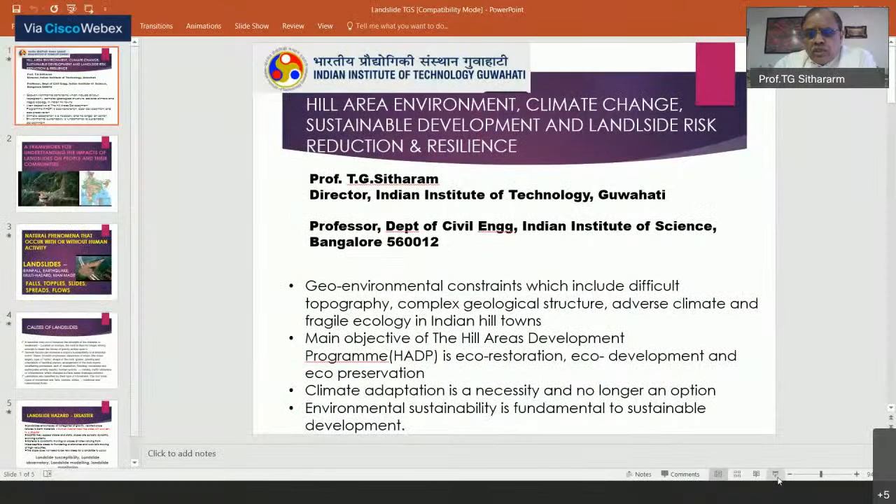So let me share a brief presentation for my special address. I hope I will be able to see my presentation - can you see my slides? Yes sir, it is visible. This topic is very, very relevant for the Northeast, that's why we immediately accepted Professor Surya Prakash's suggestion to have hill area environment, climate change, sustainable development, landslide risk reduction and resilience as the theme.

Such a long title, with very difficult topics all involved. As you know, the environmental constraints include very difficult topography, complex geological structure, adverse climate, and fragile ecology - this applies to most Indian hill towns, whether Himalayas, Western Ghats, or Northeast. Northeast is much more vulnerable because it is in zone 5 of the earthquake zone, as well as being a heavy rainfall area - it receives huge rainfall, with Cherrapunji, the highest rainfall city, also located in the Northeast.

The main objective of the Hill Area Development Program of the Government of India, under which many districts and cities have been identified, is basically eco-restoration, economic development, eco-development, and eco-preservation. As we discuss climate change, climate adaptation is a necessity and no longer an option for us. This has almost reached extremes. Climate change has caused, whether it is rainfall, floods, drought, earthquakes, vibrations, or landslides, many hazards that also cause disasters. So environmental sustainability is fundamental to sustainable development. We are signatory to the SDG goals with the United Nations, along with all other countries. It was signed in 2015, for a period of 15 years, so we have almost close to 10 years left to implement the SDG goals.

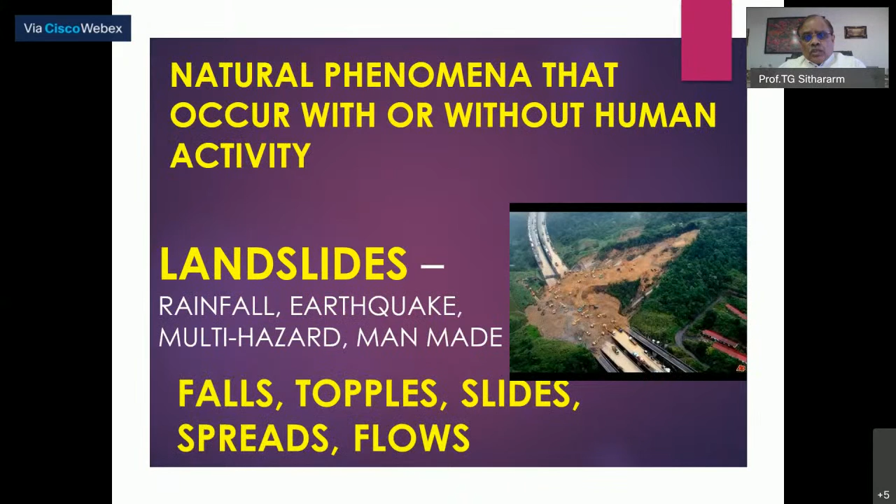Technologically also, it will be quite different. The natural phenomena that occur with or without human activity is the landslide, which is a natural phenomenon, basically gravity-related work. Due to gravity, the soil would like to come down. There could be reasons like rainfall, or induced earthquake, which is also very prevalent and common. Man-made causes include cutting, undercutting, and all that, which have already created many disasters. But what is very important is to look at the multi-hazard, because now suddenly there could be rainfall, earthquake, and also man-made activities combined, so we need to look at multi-hazard analysis of landslides.

Different types of landslides include falls, topples, slides, spreads, and flows. Let me touch briefly on the causes of landslides. A landslide may occur because the strength of the material is weakened. Particularly, we are looking at soil located on a slope - the rock is no longer strong enough to resist the forces because the surrounding soil has become weaker and forces of gravity act. So basically it's driven by gravity, and during earthquakes, that also transforms into a force of gravity.

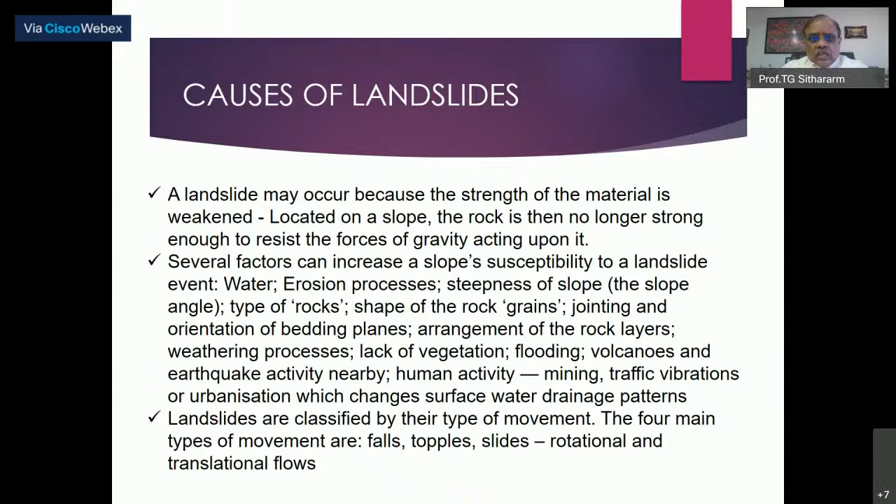As I told you, a landslide hazard turns into a disaster when it comes in contact with human habitat. Landslides encompass all categories of gravity-related slope failures in earth materials - it could be soil, sand, clay, rocks, or jointed rocks. But please remember: slopes only appear stable, they're not actually stable - they are always a dynamic, evolving system. Because Mother Earth also vibrates, these slopes are also constantly under dynamic movement.

Okay, any slope for that matter - see, it is under constant... it may not be visible to you. It looks stable and static to you, but it is constantly a dynamically evolving system. Material is constantly moving on the slopes at rates varying from imperceptible creep, which may not be visible to your eyes, to thundering avalanches and rock falls moving at very high velocities. So a slope does not need to be very steep for a landslide to occur. That is what you have to understand.

So landslide means it is not just a very steep slope where only hill slopes can come down. No, slopes can be very gentle also, but landslide can occur. Okay, that's one thing you need to carry as a message.

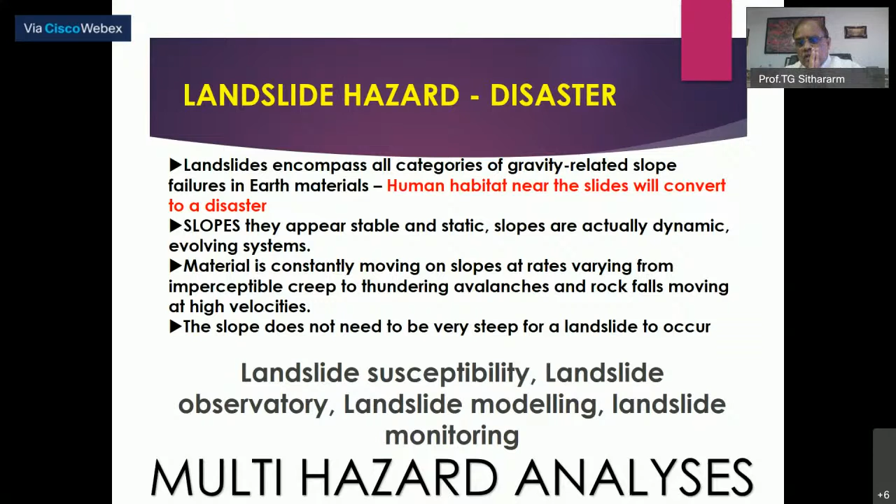Thank you. Namaskar. Yeah, so if you want me to go ahead with my talk, I will go ahead. Carry forward to your talk. Okay, thank you.

Can you see my slides? Yes, sir.

Today the topic I have chosen is not about landslides directly, but about making sure landslides don't affect our major infrastructure projects. The topic is slope stability analysis of highly jointed rock slopes in the Himalayas, and the abutments of the world's highest railway bridge across the Chenab River in Jammu and Kashmir, a very important project for India connecting Kashmir to the mainland. I've been associated with this project since early January 2005, and it's still not completed. Maybe by next October the entire bridge will be ready.

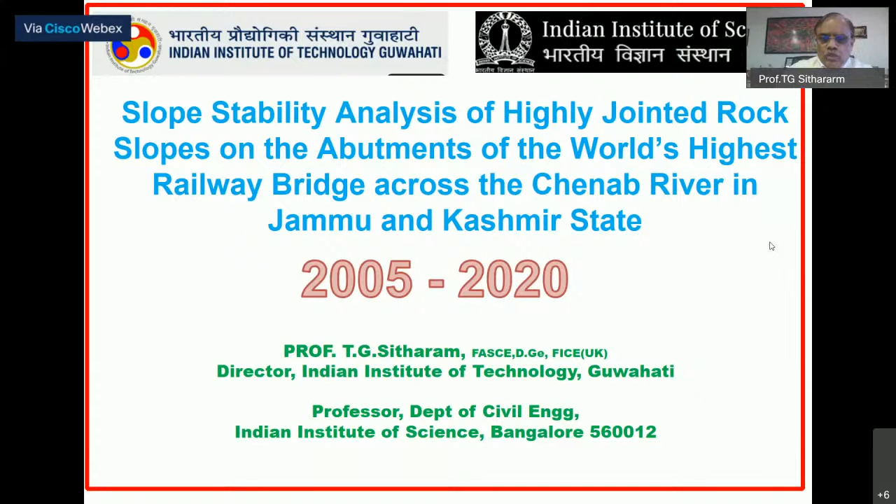So this is the Chenab Bridge location. As I told you already, it's about 50 to 60 kilometers from Katra town. I did a first visit in 2005.

In 2007, there was a lot of deliberation to change the alignment. Why did the change of alignment come into picture? Because of landslide concerns, they thought these hills are not stable. So every expert—I myself have seen 10 experts from 10 different countries, including top-notch experts of rock mechanics and rock engineering in the world.

We had so many deliberations. I was representing Messrs. Afcons construction, and there were experts also from other IITs and other places for the railways, because this project, even though it belongs to Northern Railway, was executed by the Konkan Railways, which is running this project, sitting in Jammu.

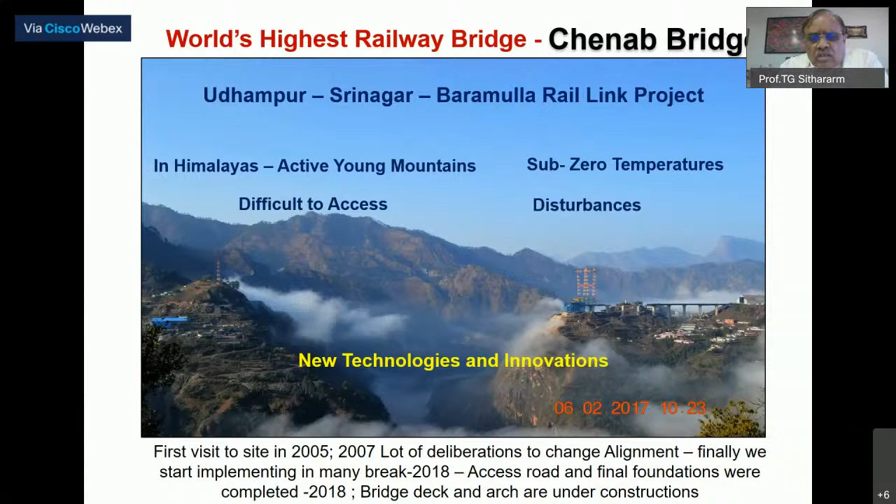This is in the Himalayas, among the active young mountains of the world, with sub-zero temperatures, difficult access, and disturbances—I don't need to highlight too much about the disturbances. So there is new technology and new innovation at every step of construction of this bridge. Almost 2005 to 2019, close to 15 years, was spent only on the embankment, the abutment slopes, cutting slopes, putting the foundation, and raising the pillars.

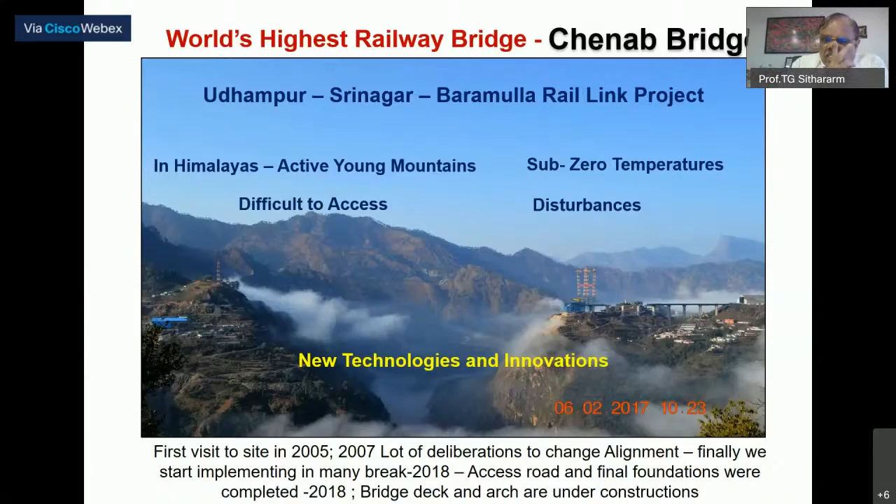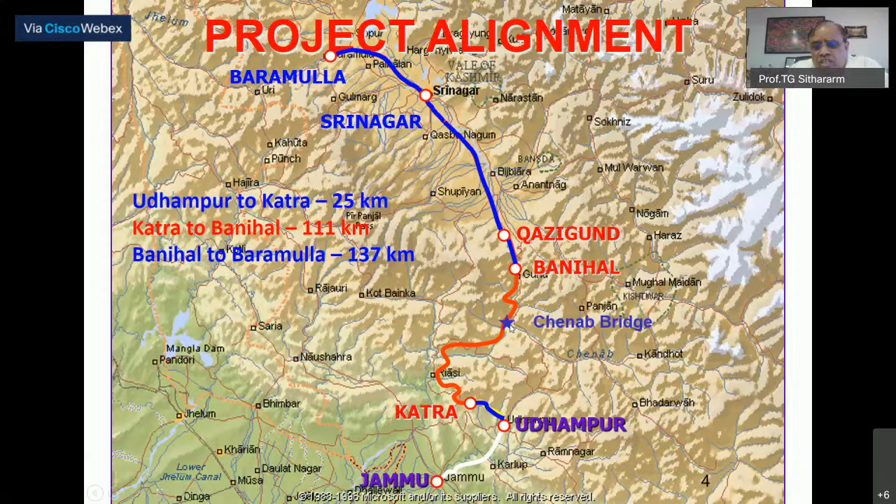So Katra, this is the Riasi which I showed you in the previous slide. Katra to Banihal is the stretch under construction, which is 111 kilometers long because of the circuitous route. And the Chenab Bridge is across the Chenab River, which is flowing there—that is the location of the Chenab Bridge. You understood now? I think the location is very clear.

So what we have adopted is a very interactive design—what we call an observational method as per the International Society of Soil Mechanics and Geotechnical Engineering. There is a special committee called TC206, which looks at interactive design, which is currently very unclear or undefined. It's a new committee looking into what this interactive design actually is.

I will highlight to you soon what this interactive design is in geotechnical engineering—it has become very common now. It appears to be the same as the observational method, but it is not; the observational method has a body of references and is quite common in tunneling. In tunneling, you excavate, observe, and then adopt a newer design methodology for the next section before excavating. It has a body of references and is already referred to in guides, codes, and Eurocodes, which also talk about the observational method. But what I'm going to talk to you about today is what is called interactive design.

Interactive geotechnical design is a design approach that requires refinement throughout the project execution period until a suitable technique and optimum scheme are applied to the problem at hand. In general, use of interactive geotechnical design is not frequent, however in large projects it has to be iterative. That is why this interactive design plays an important role in many large projects, whether it is highways, airports, tunnels, or railway lines. We learn more about ground realities and the design is modified or updated as we move ahead.

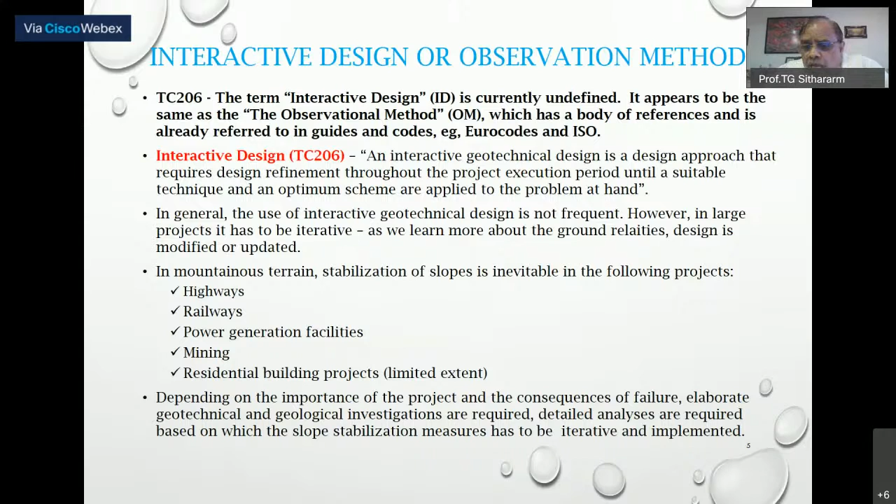In mountainous terrain it's very critical; this interactive design plays a major role, particularly in slope stabilization. It is inevitable in highways, railways, power generation, mining, and residential building projects. Depending on the importance of the project and the consequence of failure, elaborate geotechnical and geological investigations are required. But these investigations are not done once, they are done in many stages and phases, and the slope stabilization measures also have to be iterative and implemented in an iterative manner.

So what I termed it as, this is a completely new topic. We termed it this way because, as I told you, we had 15 years on this one project, with several engineers, and Afcons is very proud of this project. We called it a design-as-you-go project. Actually several PhDs have come out of this, both at the Indian Institute of Science, and right now one of the senior-most vice presidents of Afcons Infrastructure is also working on this at ISM Dhanbad.

So it's called interactive geotechnical design, which establishes guidelines and technical recommendations within the TC206 committee, which is looking at it. I recently gave a talk to them as well. So let me define the problem to you.

Highly jointed rock mass is predominant in the Himalayan regions, where the ground was subjected to severe tectonic activity due to the pushing of the Gondwana land into the Eurasian plate. As you know, the Indo-Australian plate is where India is located. This Indian plate is pushing the Eurasian plate at a rate of 50 millimeters every year. That means the Himalayas are rising every day. Please understand this movement is common.

So when you look at stability aspects, this movement has to be considered, because it is not a small movement. Seismic activity is also still very present, since this is a plate boundary between the Eurasian and Indian plates. So the problem is, because of this, these rock masses are highly jointed, which is close to soil from a strength point of view, but behaviorally it still has jointed characteristics.

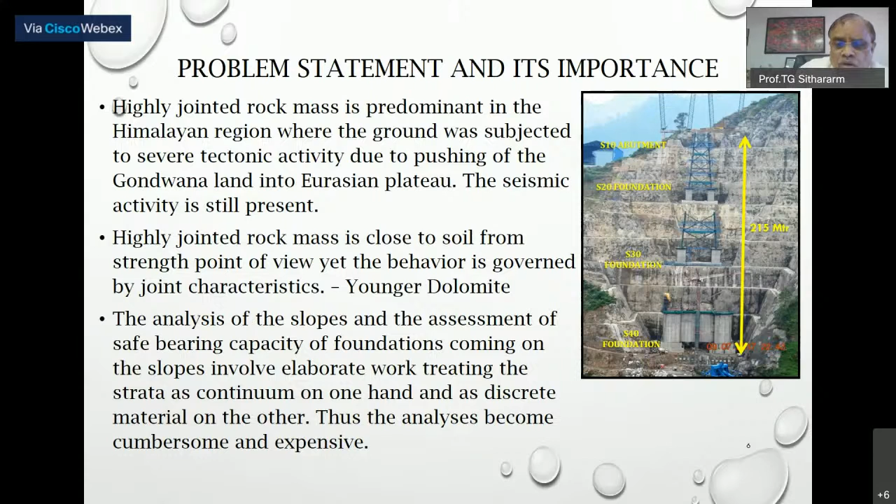Our objectives, posed to me by the company, were to determine the intact rock and rock mass parameters for the analysis and design of slopes in jointed rock mass, suggest appropriate parameters based on detailed geotechnical investigation for slope design, determine the stability of slopes, suggest appropriate stability analysis and stabilization methods, and lay down the principles of design-as-you-go, bringing out the methodology and its implementation.

Every section which is constructed, we have to go and visit. So I might have visited that location maybe about 25 to 30, 35 times. Very difficult to reach, but that is a different experience. Once you see the pictures, you will understand.

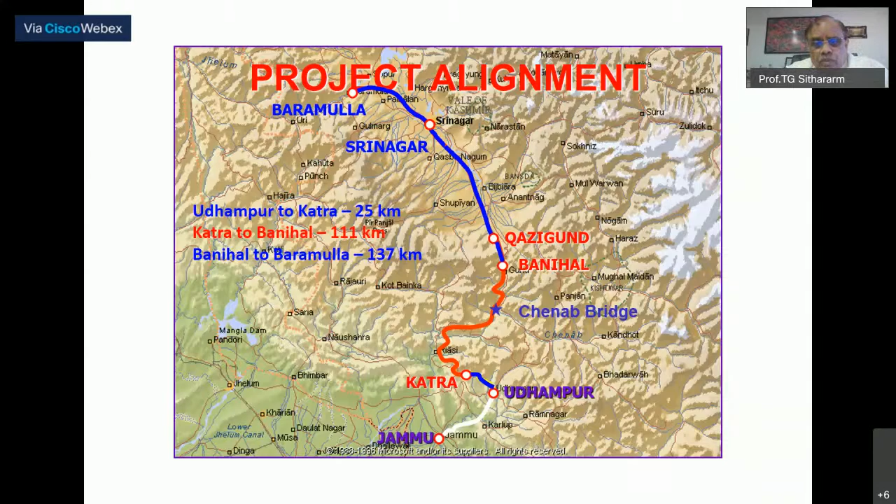So let me tell you about the bridge. As I told you, the Chenab Bridge crosses the Chenab River, between Katra and Banihal. The deck is about 362 meters above the water level of the Chenab to the top of the deck, and this is a complete single arch spanning a width of almost 780 meters, with a total length of more than 1.3 kilometers.

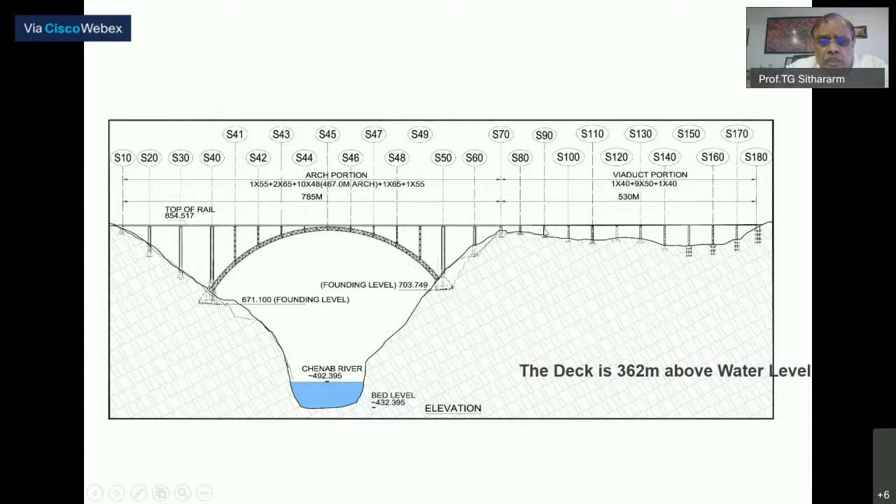And this is the approach viaduct portion. Please note these are all tall pillars, and the bridge itself is a steel bridge. It is taller than the Eiffel Tower.

This is how the slopes were cut, and even the design of the slope profile to be used involved several discussions. Initially we thought we could put the pillar foundation through a drilling machine taken by helicopter and then drill and put the pile foundations. All options were discussed, deliberated, analyzed, and finally this cross section was adopted.

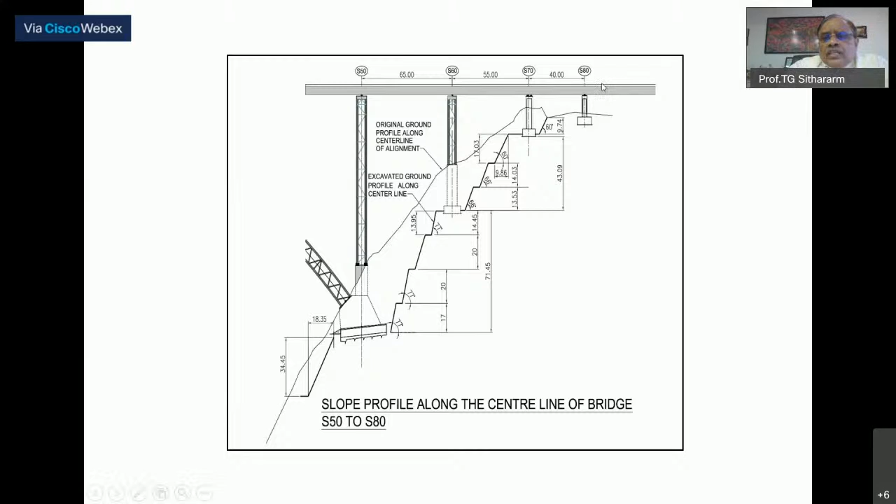This is from the left side, from S10 to S40, and on the other side from S50 to S80. This is where the S50 foundation is anchored through the arch, and these are the columns - S50, S60, S70, S80 - going up to S180 in the valley.

So you can see the terrain before excavation and after excavation. To do all this, we needed to cut a lot of slopes to make roads and access roads so that construction equipment could move.

Whatever is done in this project is a world record, including the crane, which they have entered into the Guinness Book of Records. Everything is beyond imagination, and the kind of rock cutting which we have done is huge and unimaginable.

So the first question was, is this site stable? We went through by foot and by boat and looked at many landslides. But at the correct site, where we looked 2 kilometers downstream and 2 kilometers upstream of this location, there were never any landslides - otherwise beyond 2 kilometers, a lot of slope slips had occurred.

So you can see the S40, S30, S20, and S10 foundations - this is a 215 meter tall slope on one side of the abutment. Look at the quantity: 3.15 lakh cubic meters of excavation, and this doesn't include the road construction excavation - this is only for this slope.

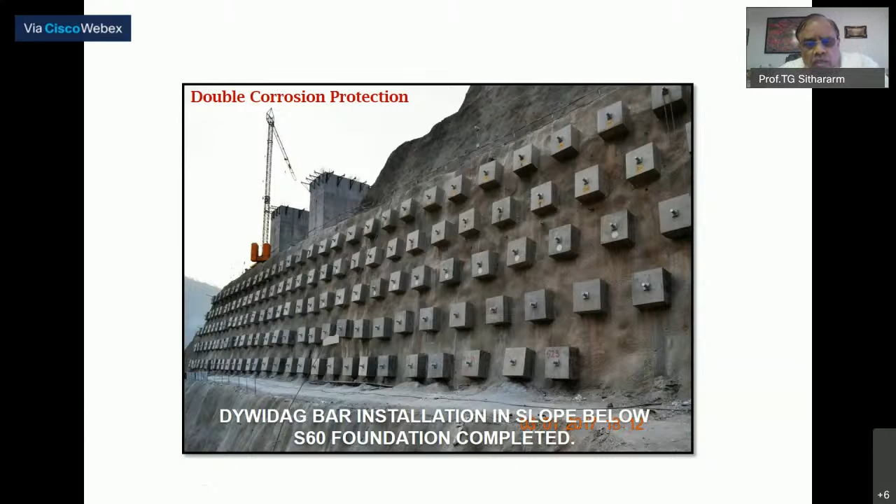The kind of rock bolts we used, the Dywidag bars installation in the slope - this is one typical example of the rock bolts shown. Double corrosion protection rock bolts were used, and since we didn't have a proper code in India, all the BS standards were used, as was required by the railways.

The field investigations - these were the initial slopes. You can see these are some of the cut slopes made for the access road. We had to cut a lot of access roads to reach this location of the bridge - finally, this is the location of the bridge. On one side, soon after the bridge, it enters into a tunnel, which makes this very unique, and also the wind speed there is very, very high.

So for geological logging, I even suggested to them - this is what myself and Professor Ramamurthy of IIT Delhi suggested - that we should have an adit tunnel just above the foundations.

So that means this will be excavated now, and when excavated, this will be vanishing. Okay, so this was above the foundation level at S50. Similarly at S40, this is the location you can see.

So we have drilled about almost 300 meters, and then went in laterally also another 150 meters on either side. A lot of tests were done. We can visualize what kind of rock, what kind of joints, was there any slip failures, and all that. So geological logging of these drifts were done.

Okay, and also outside the drifts, open area pits are also done. So a lot of logging was done. We could see many joints, J1, J2, J3, J4, and in some places more than these 4 joint sets, but 4 joints are very prevalent.

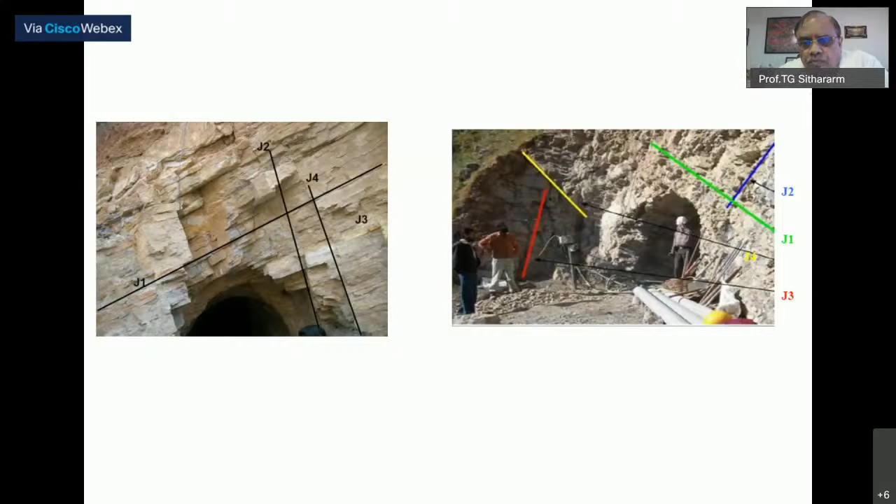Okay, so this is the adit which has been mapped with joint locations. So you can see the final geology of the main tunnel and of the drifts. Just to summarize: highly fractured dolomite, joint spacing between 20 millimeter to 500 millimeter, joints filled with silty sand and silty gravel, presence of open joints.

I will take 5 more minutes to complete. RQD 0 to 10, RMR 35 to 42, UCS 16 to 62 megapascals. Permeability is more than 50 lugeons. There is no groundwater at all. Okay, so this is a very complex site.

I will not get into the details, but some of you may be interested. A lot of geotechnical testing was done over a period of time and in several phases: plate load test, in situ box shear test, borehole data. Based on the borehole data, RQD, UCS, RMR was also done. Settlement characteristics like shear wave velocity and tomography were also done. Dilatometer test, plate load test data, borehole data - lots of tests.

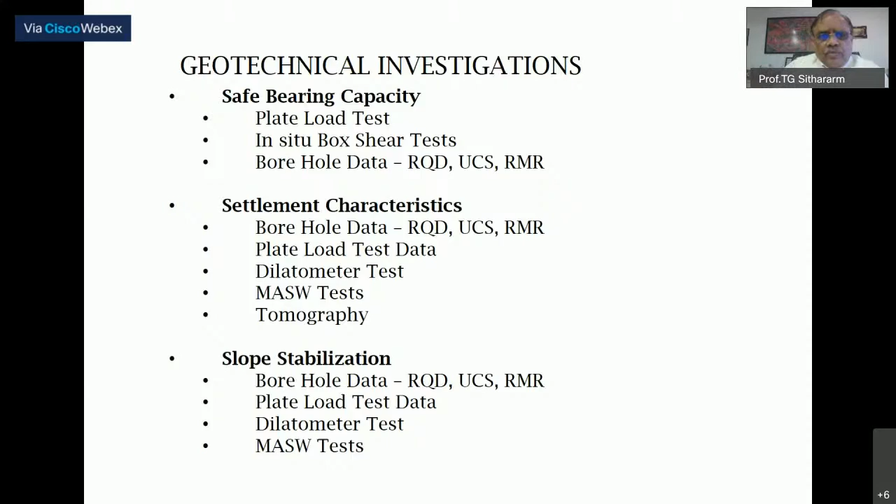Okay, so summarizing these parameters and deciding what to select for the analysis was also a great challenge. Many discussions were held with the technical advisory board, several parameters were selected, several variations were done, and minimum parameters were chosen for the analysis.

Then coming to the earthquake - this is the area, and even though we say it is zone 5, India doesn't have a record of any strong earthquakes here. We have not recorded properly yet, because proper recording has only been done in the last 20-30 years. So there are not many major earthquakes recorded.

But what we have designed for is the maximum credible earthquake of 0.36g, and design basis earthquake of 0.18g. We have taken both the vertical as well as horizontal components of these accelerations on the slopes.

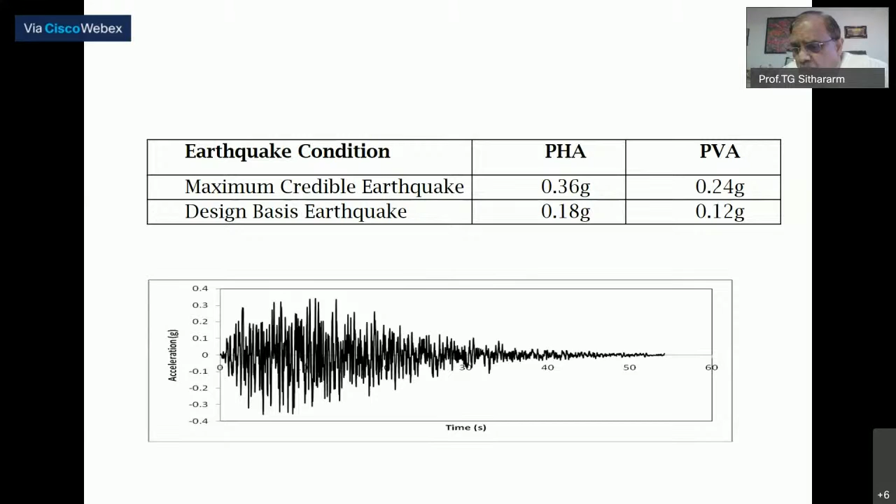So for the slope analysis, the railways have asked for a minimum factor of safety of 1.5 with static load after the excavation and putting the treatment. The static load with DBE seismic load factor is 1.2, and static load with maximum credible earthquake seismic load is 1.

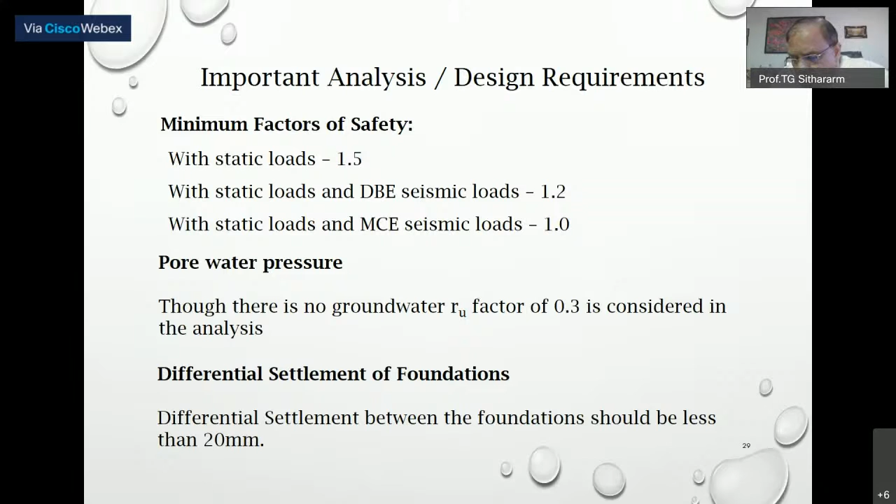Pore water pressure - though there is no groundwater, you should still take some pore water pressure into account. That was the recommendation, so a Ru factor of 0.3 was considered. And differential settlement allowed was only 20 millimeters. Please note that, that's a very important design parameter.

So numerical and analytical programs were used. Many of them we have done - as I told you, 3-4 PhDs are completed at the Institute of Science, and right now one more PhD is going on.

So average dip direction and dips were used, Swedge continuum approach was used, FLAC and Slide were used, and also Itasca, which is a University of Minnesota company, has also done analysis using 3DEC. Anyway, I will skip some of this analysis data - you can see the pictures. If you have any questions, you can ask me.

So this is, finally, from our detailed analysis of more than 10 years and a lot of PhD theses, what we found is that the bridge is like an ant over an elephant. These slopes are so huge - there could be some slips and other things locally, but globally this bridge is not going to change any scenario, because these are moving slopes anyway. So putting the bridge is not going to change any scenario.

So I even termed it and put it in front of the very high profile committee - I said it's an ant over the elephant, it's as simple as that. That means the elephant doesn't even feel the ant.

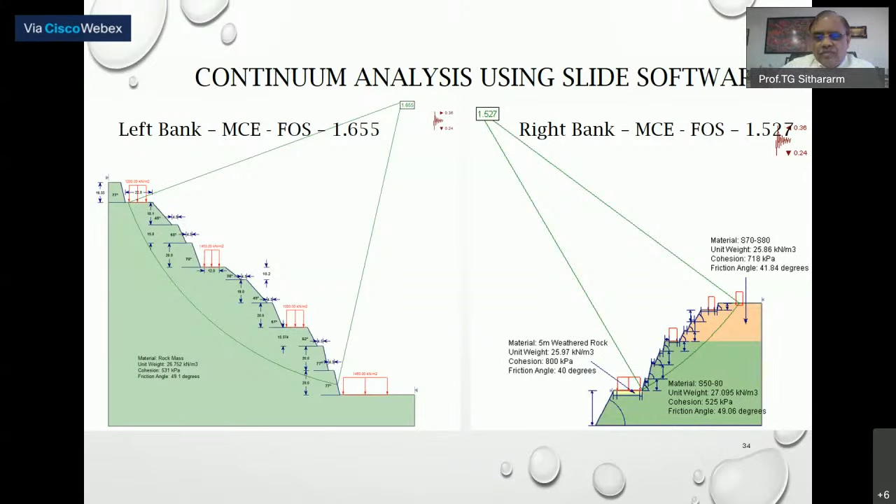Okay, so the continuum analysis - it's a lot of analysis, I'll tell you, I don't like going into it because as I told you, 4 PhDs have been completed on it. So it's very difficult to summarize. All the displacement, relative displacement, was kept less than 20 millimeters. So our strengthening measures - rock bolting, done in stages with excavation - all that is fantastically done.

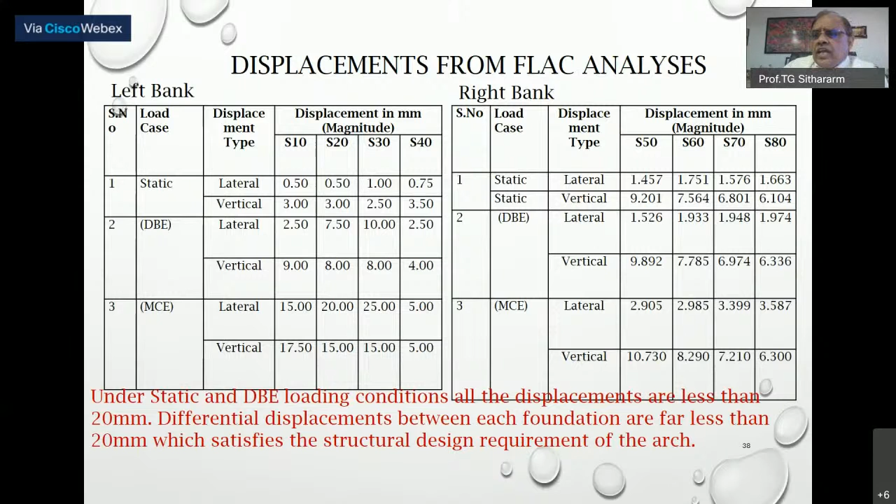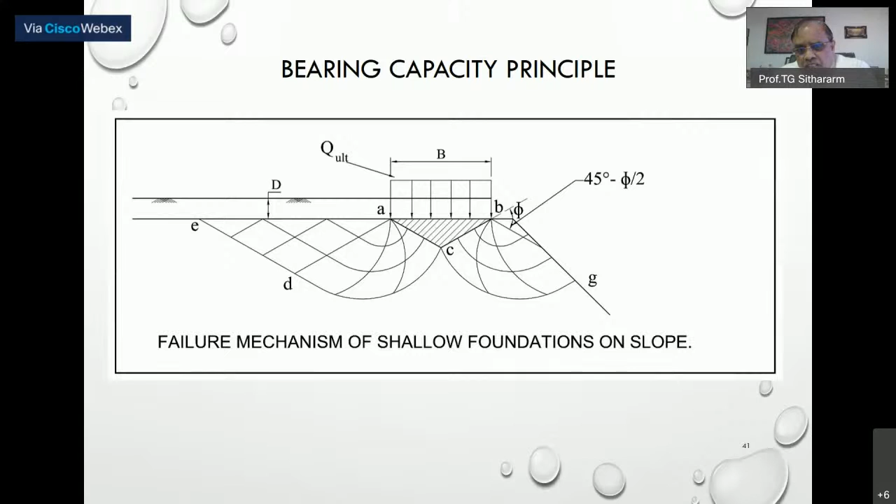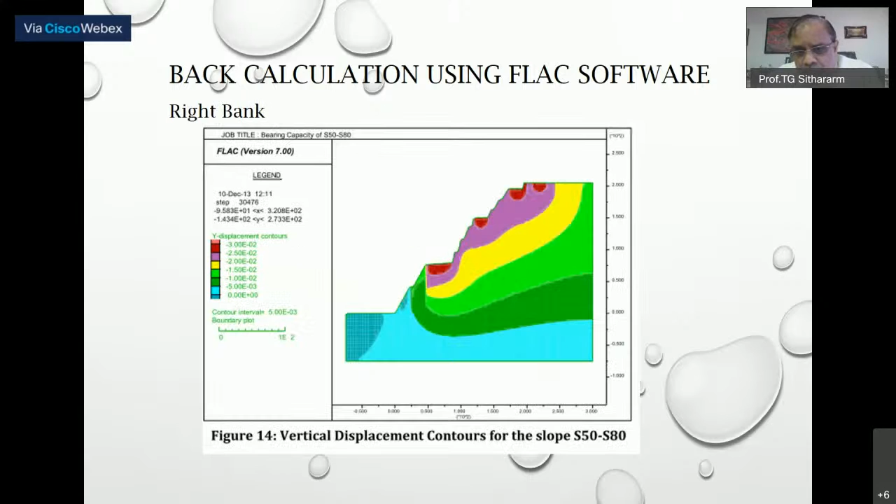The dynamic and differential settlement and differential lateral displacements were also considered. Under dynamic loading, static loading, and quasi-static analysis were all conducted. Under dynamic loading, the predicted displacements are towards the right side into the hillock, hence not endangering the slope. Then comes safe bearing capacity - the problem is, since these are all on the slope, one side of the resistance will never come in, so there are no proper guidelines. Ledge resistance is the only guideline in the Bureau of Indian Standard Codes, so we took those guidelines and designed, and finally assessed the bearing capacity. I will show you some of the bearing capacity analysis, and since we have done slope stability also to evaluate our safe bearing pressures.

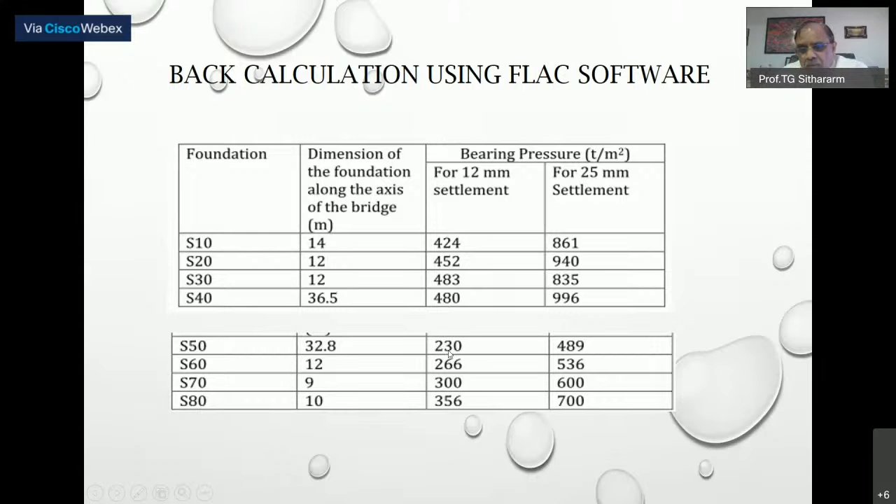I found that the bearing pressures look at 424 to about 1,000 ton per meter square at different locations of the foundations. 230 was the lowest. But what did we use? From the slope stability analysis also, we consistently get more than 200 ton per meter square. But what is finally recommended? Only 100. And this was again discussed with the railways - they adopted only 90 ton per meter square. So you can see how much.

Why 90? Where was the logic? It is based on RQD, but RQD is such a crude test. RQD was the only one which gave the lowest value, 87.4. But the rest of all techniques gave a very beautiful, high value of the safe, reliable bearing pressure.

Anyway, I will conclude as I promised you. Kinematic analysis was also done, and predominantly we see some wedge failures locally. That is why we adopted a lot of rock bolting using Dywidag bars and other things. Wedge failure analysis was done very methodically after every excavation, so that we did not face any failures - we never had any failures.

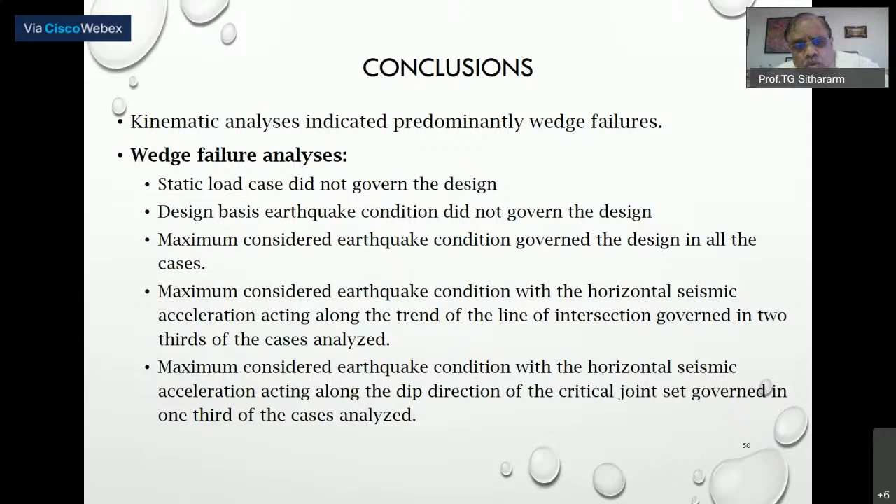Static load case, dynamic load case, and quasi-static load case were all analyzed. Continuous analysis was done on both sides for excavating. Safe bearing capacity was adopted at about 90 ton per meter square, and then assessment of slope mass rating. Whatever methodologies are available in literature, all have been tried, attempted, and demonstrated for this project.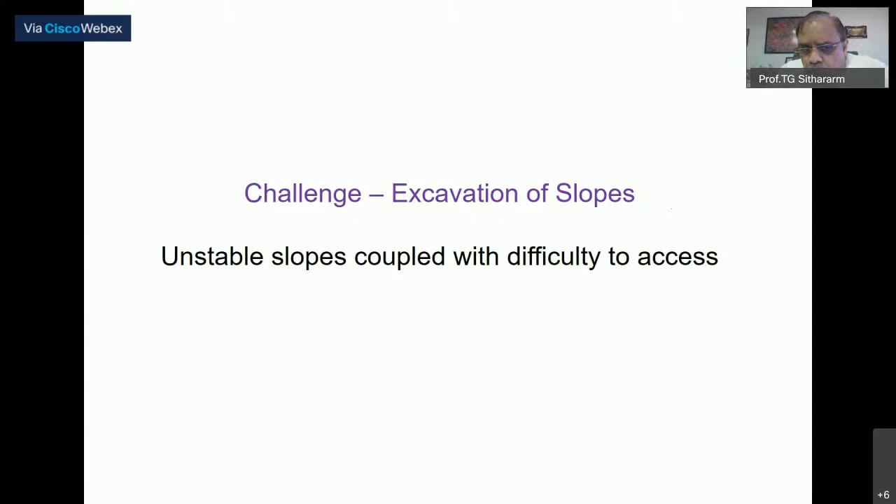Just to give you a last slide on the challenge of excavation of slopes: unstable slopes coupled with difficulty to access. We had to make a 2.5 kilometer approach road on one side. Thanks to many of the railway engineers, it's a very hard job - every day moving on the roads is a nightmare. Whenever I went, I used to close my eyes and sit, because you can't see the right side or, while coming back, the left side. It's very, very scary, because it's almost like 300 meters up. Suddenly there are no curbstones, nothing, and roads are also not properly made - it's all under construction while we were moving there. So making approach roads alone will take a lot of time and a lot of analysis.

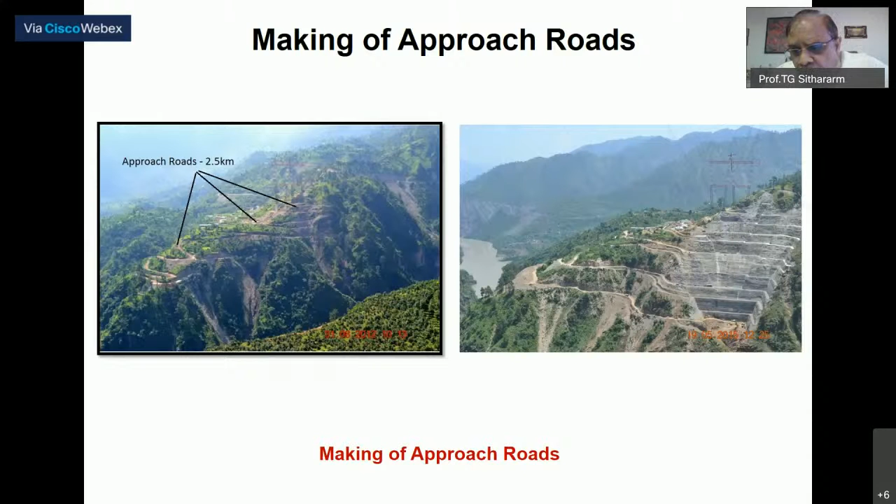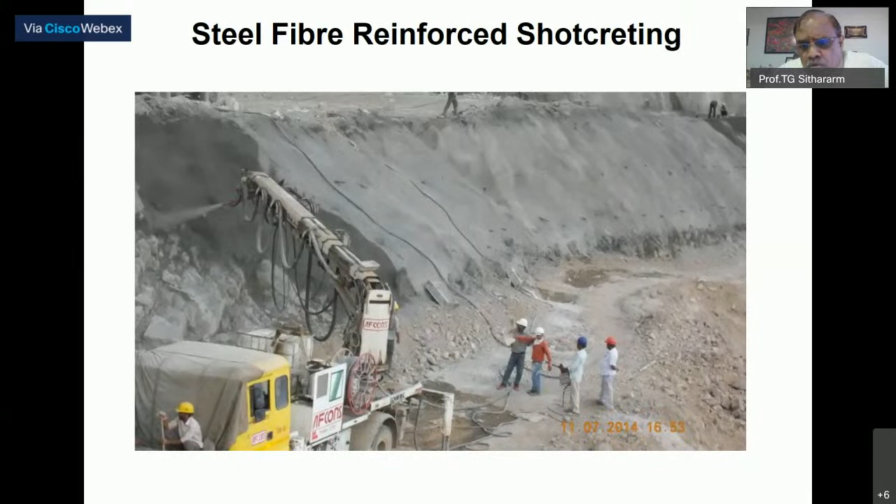The excavated slopes were shotcreted using very high technology materials. Cleaning was also done very methodically - congratulations to Afcons. These are the kind of fabricated rock bolts you can see. High technology equipment is used, and many times this kind of drilling equipment is also very state of the art. Everything was state of the art, because we are building the world's best.

So the key to success is discipline: strictly follow the contours during excavation, strictly follow the top-down construction, design as you go, validate the design assumptions as the excavation progresses. A lot of testing using sophisticated equipment with robotic controls and high reach were done.

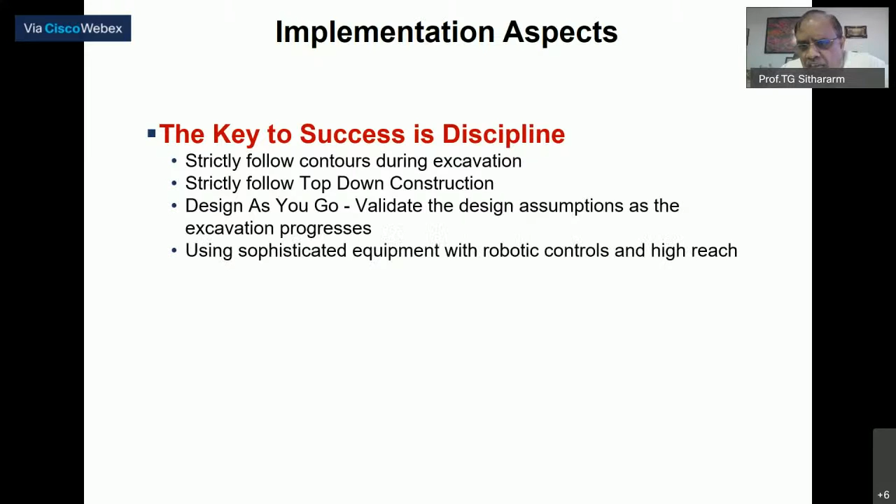To conclude, the kinematic analysis indicated predominantly wedge failure locally, but otherwise the total slope was perfectly stable. Even today I can guarantee you, as I told you, the bridge is going to put a very, very small load - even though for a structural engineer this is one of the highest elevated bridges and one of the most complicated bridges with earthquake, land, and wind load. Large loads are coming, but to me, for my slope, the entire bridge with all the wind load and earthquake load is like an ant to an elephant. With this, I thank you very much.

And this would be the final bridge - when it comes, it looks like this. Thank you.

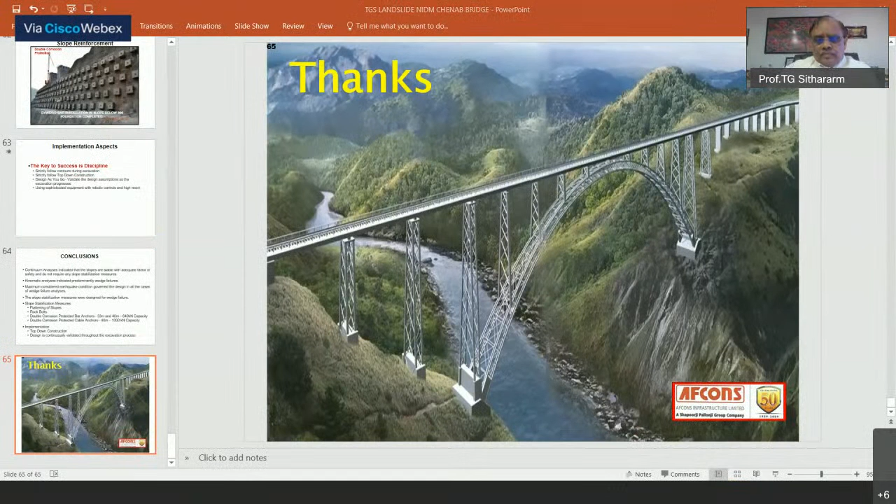Thank you for highlighting the Chenab Bridge project and briefing about the interactive design and observational method in the Himalayas.

Sir, one of our participants, Mr. Hemant Kumar, asked a question: does continental drift or subduction also affect landslide occurrence? Please repeat the question. Is continental drifting or subduction also affecting landslide occurrences?

Definitely. As I told you, slopes are all moving, because there is movement of the landslide mass itself. So it's a gravity effect, and it will definitely be aided further by rainfall and earthquakes, or human activity like vibrations. It will be accelerated. But otherwise also, these slopes are continuously under movement.

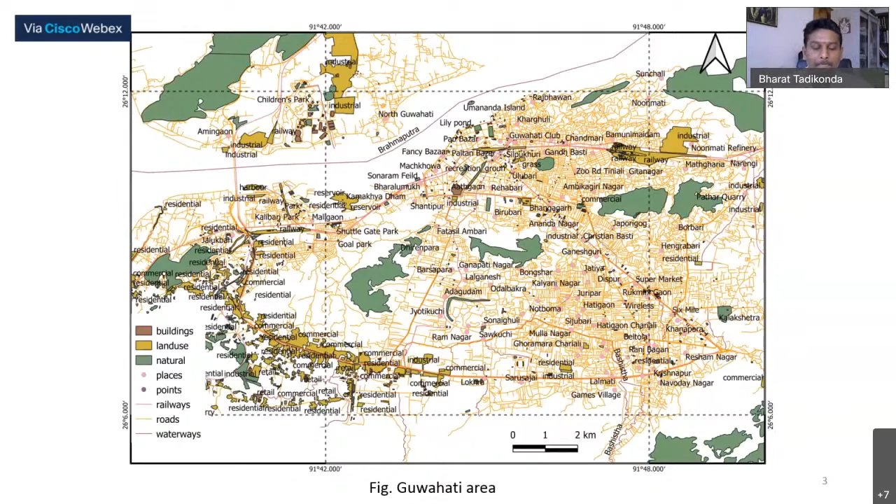If we focus on the striking geomorphological features, there are 9 hill series situated in and around the Guwahati area. There are also low-lying alluvial plains and marshy wetlands. The important hill series for this presentation are the Nabagraha Sunsali Noonmati hill series, on the southern bank of the Brahmaputra river, and Agyathuri hill, on the northern side of the Brahmaputra river. Our IIT is situated next to Agyathuri, between the Agyathuri hill series and the Brahmaputra river.

And the Nilachal hill, the 5th one, where the Kamakhya Mandir is situated. From IIT Guwahati campus, we see the Nilachal hill. Currently from my window, I can see the Nilachal hill. So this is the geomorphological features of Guwahati.

All these hilly areas are susceptible to rainfall-induced landslides, because even though they are comprised of granite gneiss complex, they are capped with residual soil formed due to disintegration or weathering of in-situ rocks. So all of them have this red soil formation due to vegetation and weathering processes.

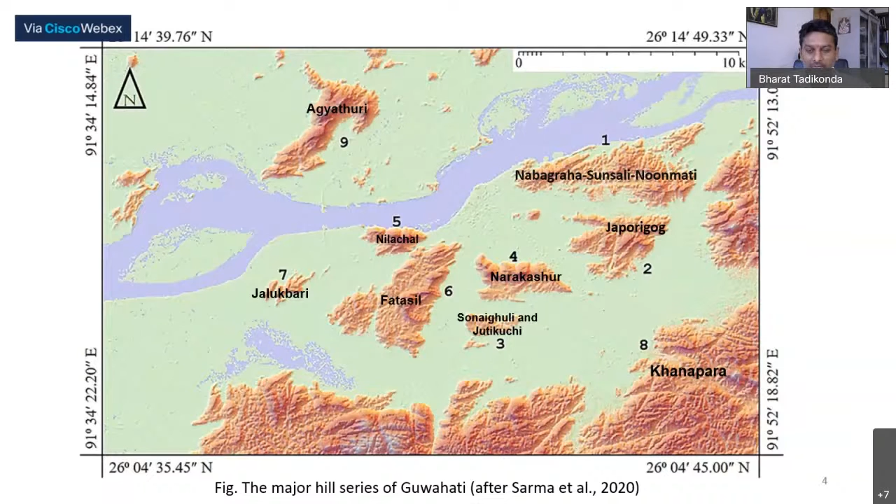So I'm focusing on the Agyathuri and Nabagraha Sunsali Noonmati hill series, because several landslides occurred there in the month of June 2020, very recently, a few months ago. This is very close to IIT Guwahati, the Agyathuri hill series, and the other one is right across the other bank.

So let me go through some of the landslides at the local scale. This is on the Nunmati, Nabagraha Sunsali Noonmati hill series, also called Kharguli Hills. On the Kharguli Hills, this is the Raj Bhavan, where the governor's building is situated, and there is a landslide that occurred on 24th June 2020.

If you have a closer look of the landslide, there is a mud flow that has taken place. I'll come to that, why there's a mud flow that would have taken place here.

And there is another landslide that has taken place 2 days after the previous landslide, on 26th June 2020, near IIT Guwahati. This is also called Kali Pahad, part of the Agyathuri hill series.

Along this there is a national highway, a 4-lane road, which is entirely buried with debris consisting of huge boulders. If you compare the earlier landslide and this landslide, there's a huge difference. Earlier there was a mud flow, but here there were boulders that have gone down under gravity.

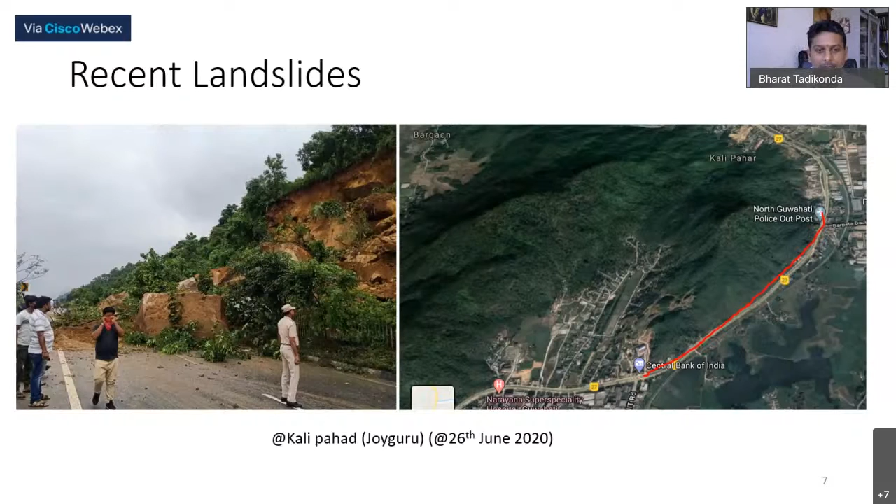Even though the landslide has taken place nearly at the same time, only 2 days apart, there is another landslide on the same hill series where the Raj Bhavan is located, the Kharguli Hills, on 28th June. All 3 landslides occurred within a 2 day interval.

Here debris has flown into one of the residential areas and killed some people, including a young budding artist from Guwahati. Here also there is a debris flow, mostly of very soft residual soil that has flown down.

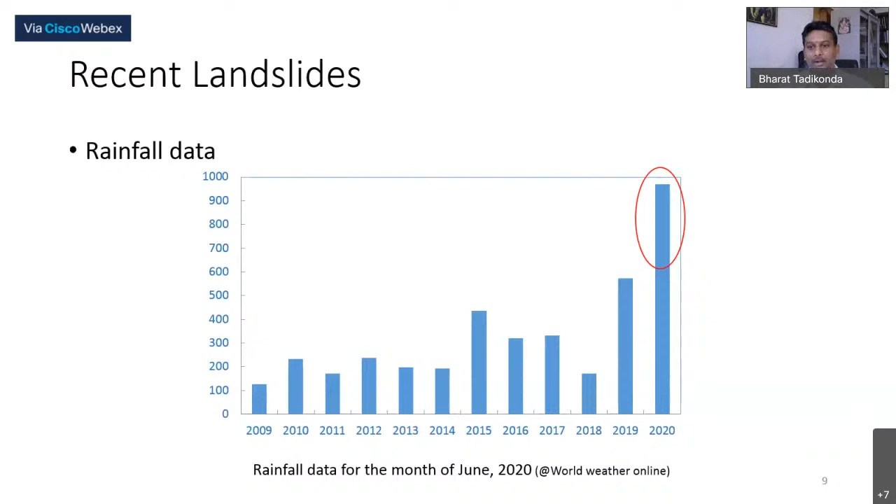It is noteworthy that from the rainfall data I collected, the precipitation for the month of June is the highest compared to the last 10 years, and that would have caused the landslides.

But if you observe the daily rainfall data, the striking observation is that there were 2 peaks within day 0 to 30 of June. On June 6th there is one peak, and near June 16-17 there is another peak, both higher than a 3rd peak. Most of these 3 landslides occurred during this particular time interval.

This throws some light on the fact that, first of all, climate change effects definitely have an influence on landslide occurrence, but also the in situ characteristics of the soil and the in situ conditions play an important role.

That is the reason why for the Raj Bhavan landslide, if you see the history, there was already a landslide that took place 2-3 years ago. This is a repetition, therefore a mud flow occurred. However, for the Joyguru landslide, this is the first occurrence, and therefore there's a huge debris flow and huge rock mass have come down.

There are other local soil characteristics or features that will be explained in a minute. Similarly, for the Kharguli landslides, there have been several landslides in the past, and this one occurred after the rainfall peak had receded.

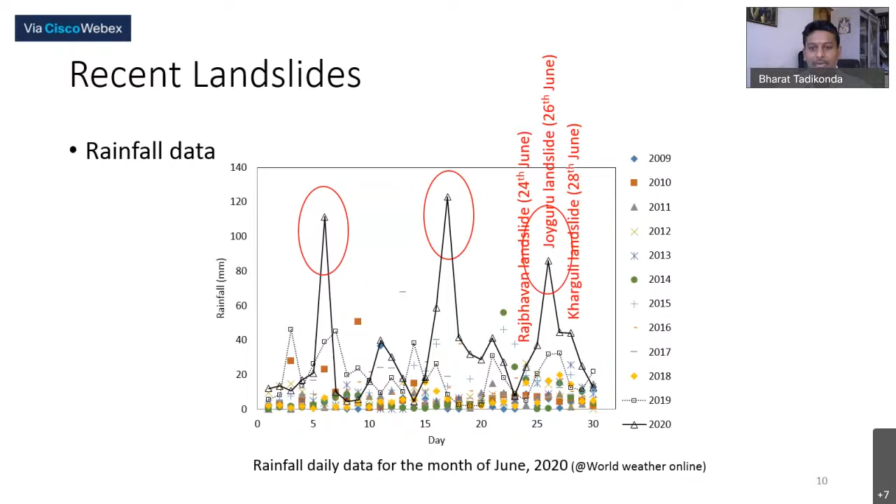However, we don't have the field characteristics or soil characteristics at the in situ, because due to the pandemic we couldn't visit many of these places. Based on our experience from another landslide in the previous year, June 2019, in Shillong on the Meghalaya plateau, we got a lot of information from that particular landslide.

So I'll present some of the initial in situ characteristics of the soils and how they play an important role in landslide occurrence. This is at Nehu, Northeast Hill University, Shillong, where there is a Sports Authority of India complex, the SAI campus, situated on a hilly area.

On the left hand side you see a plain ground that was made flat, though there was originally a very gentle slope of a hill. So they made an athletic track there. Here the landslide location is shown, and the right hand side picture shows the landslide location.

There was an abutment wall they constructed on the hill slope, which however gave more weight on the hilly area, and then it also failed during the landslide. This occurred on the 27th of June, 2019.

We analyzed the precipitation data from 1st June to 15th July, and the rainfall precipitation was highest on 27th June, and in fact the failure also occurred on the same day. However, the initial conditions, that is the initial moisture present in the slope, will also play an important role.

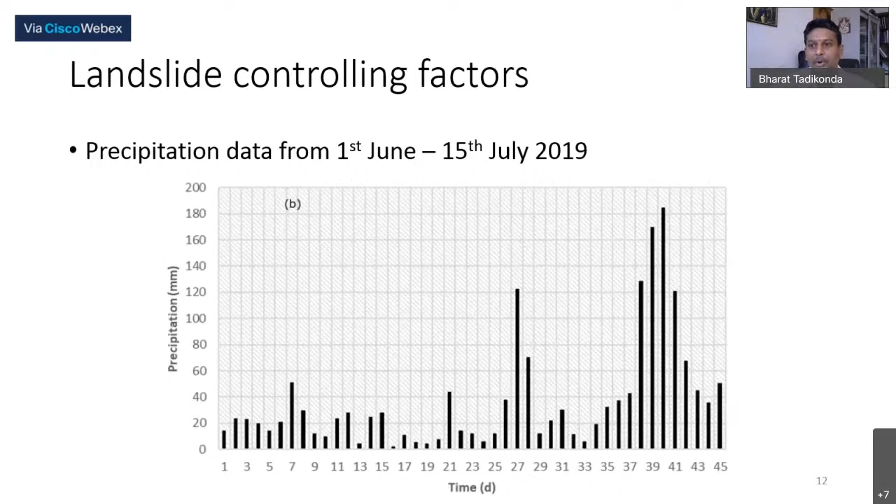So these are some of the controlling factors at local scale: initial wetting conditions of the slope, soil field density, slope angle, vegetation, and unsaturated soil characteristics. From regional scale, however, we can only capture some features, and sometimes the soil moisture as well.

At the local scale, some of these soil characteristics are so important for predicting rainfall events. The global rainfall landslide index can give you a feel for landslide occurrence or vulnerable areas. However, specific information about unsaturated soil characteristics and other details can provide the exact occurrence of rainfall-induced landslides.

So even after visiting the place following the rainfall and landslide, we could not get the moisture profile within the slope because it was not monitored before. So we simulated using about 10 months of rainfall data through transient flow analysis, and we found the factor of safety was much higher than 1, indicating it was safe, and we obtained the moisture profiles within the slope.

Another important characteristic is unsaturated soil properties - these are constitutive relationships such as water content. On the left-hand side, you see water content versus suction. The suction comes from the surface tension at the air-water interface.

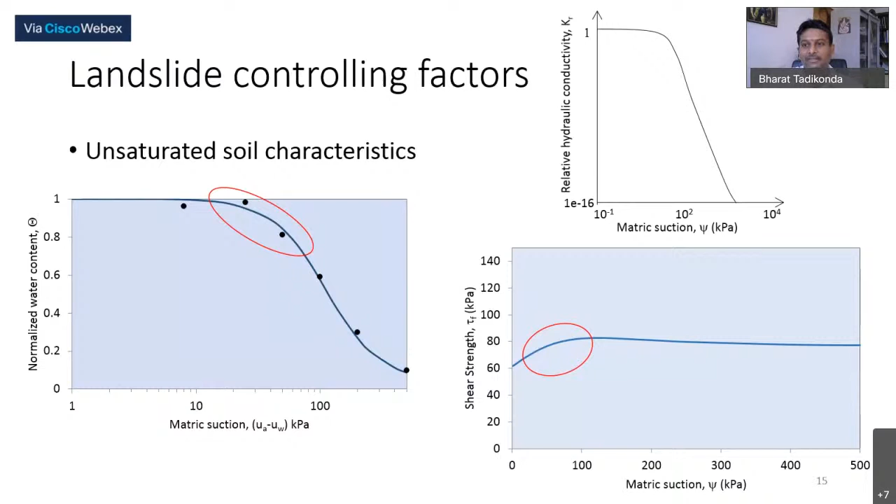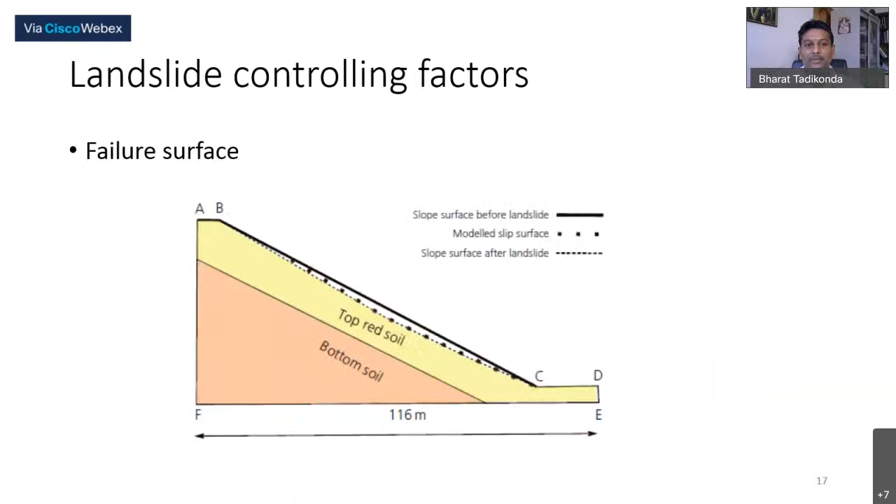So we conducted several other experiments in the laboratory to determine these characteristics in unsaturated states, and we could predict the failure surface very accurately, and also predict the failure that occurred on 27th June accurately.

Such detailed analysis is only possible when soil characteristics at the local site are available. To conclude, harsh climate change is severely detrimental to the occurrence and prediction of landslides, and local scale effects such as unsaturated soil characteristics, field density, soil rock conditions, vegetation, and initial moisture content also play a vital role in landslide occurrence and cannot be ignored apart from regional scale aspects.

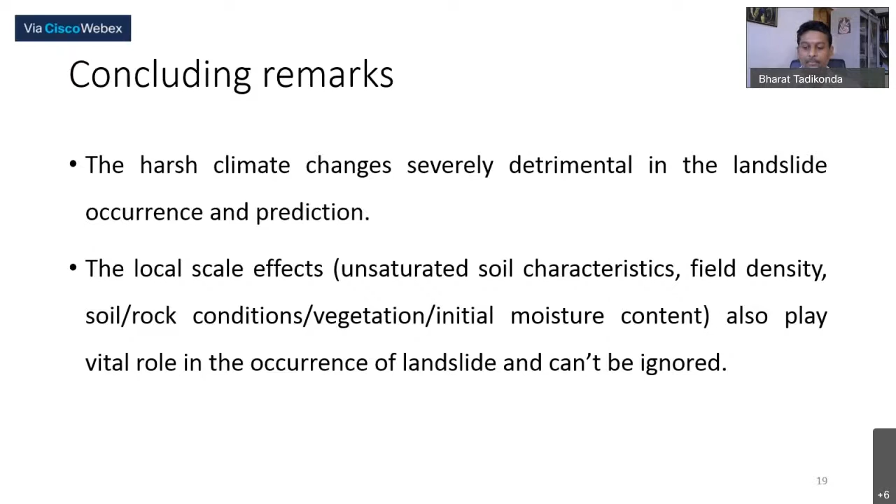Now this is over to you, sir, Professor Mahanta.

Sir, I started my presentation before you, Professor Mahanta.

Hello, everybody, I'm so sorry. I think I got into the participant group, so I didn't have control over my audio and video. Then I requested the host to connect me, and I'm now connected. I don't know how much time we have.

If we have some time, I can bring a couple of slides. Otherwise, I can give a summary, primarily because you have listened to both of my esteemed colleagues, Professor Sitaram and Professor Bharat.

And the point that I hope has settled is the kind of extensive and intensive work involved. If you listened to the presentation made by Professor Sitaram, you noted the extensive and intensive work that goes into a single project. On the other hand, the three landslides that Dr. Bharat presented - we worked as a team, and two of them are just within a couple of kilometers from our IIT campus, and the other one is about 1.5 hours' drive from Guwahati in Shillong.

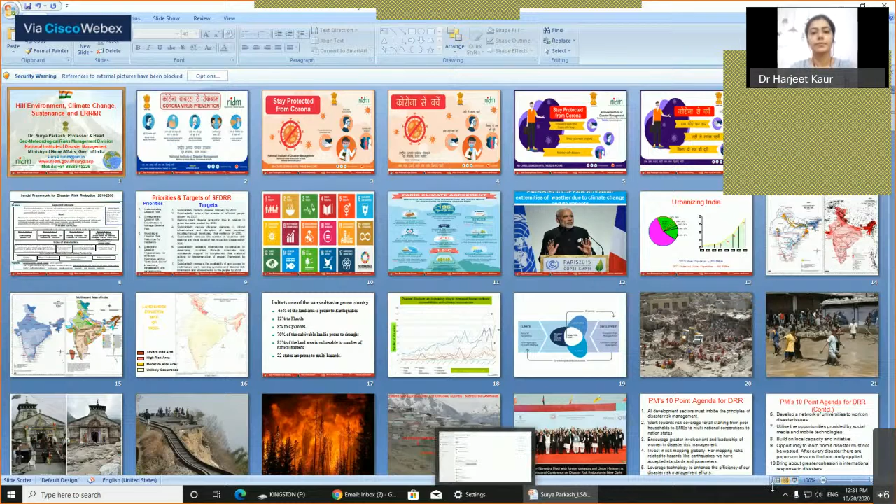Yes sir. Okay friends, my previous speakers have informed you about site-specific issues related to diagnosis and treatment of landslides, particularly focusing on infrastructure and construction works related to civil engineering departments.

Now let me take it as a challenge for the regional development sector at large within the country. So first we will talk about pandemics, which are very much predominant these days.

Before I go ahead with my PowerPoint, it's my duty to consider the Prime Minister's movement and campaign going on at present: a 3-step process. Wear your mask properly, keep social distancing, and keep hand hygiene - wash your hands regularly and do not touch your face often.

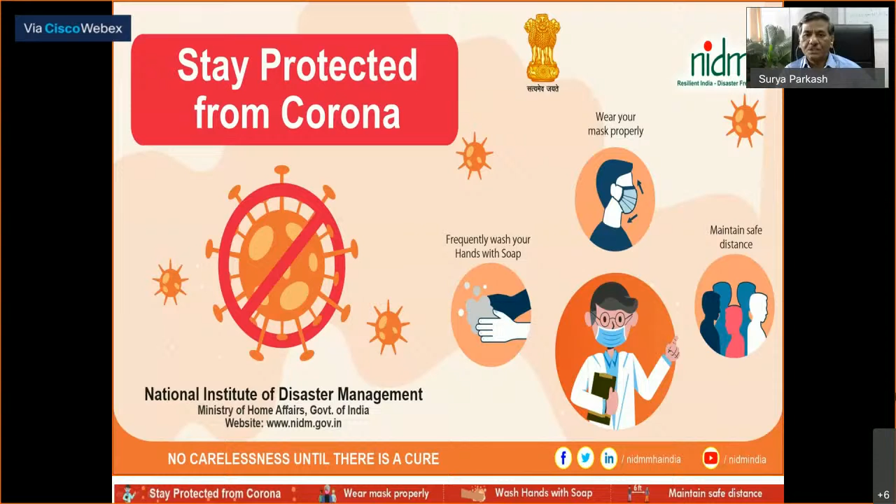These are some of the things taught repeatedly by our experts, and recommended by all others. I would like you to kindly focus on coronavirus prevention. Let me show some slides focused on the message given by the Honorable Prime Minister: no carelessness until there is a cure. Jab tak dawai nahi, tab tak dhilai nahi.

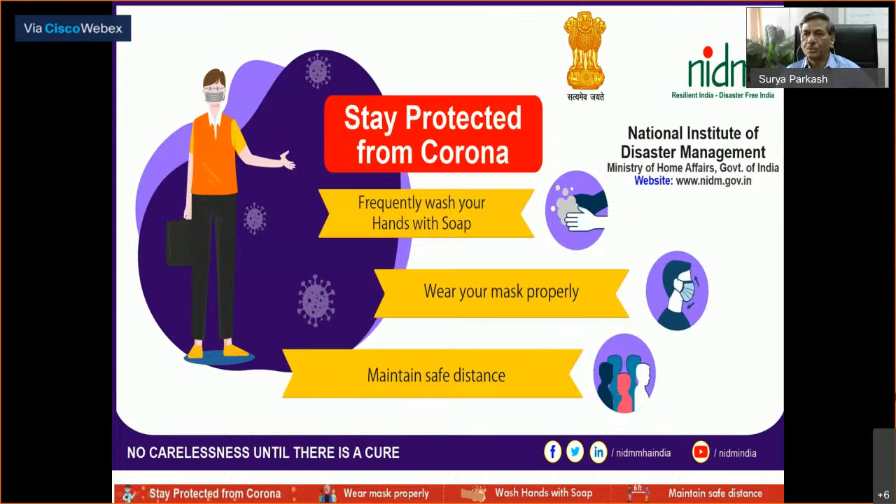So it's my request to all the delegates, participants, and honorable speakers to kindly follow the recommendations made for coronavirus prevention and protection. In your offices and wherever you are going, kindly follow these 3 steps: frequently wash your hands with soap, wear your mask properly, and maintain social distance.

Now I come to the subject matter - we are talking about climate change and its impact, particularly in hilly areas in terms of landslides and related disasters. There is a Czechoslovakian proverb: misfortunes enter when the window is left open to them. We are always making errors in our calculations, or there are uncertainties or unknown parameters which become driving factors for disasters to happen.

Next, I want to bring to your knowledge our SFDRR, Sendai Framework for Disaster Risk Reduction, where we have 4 priority actions and 7 targets defined. It's very important for all disaster managers to remember the first priority action is understanding disaster risk - learning what governing parameters affect the occurrence of these disasters with changing climatic conditions, urban development and growth.

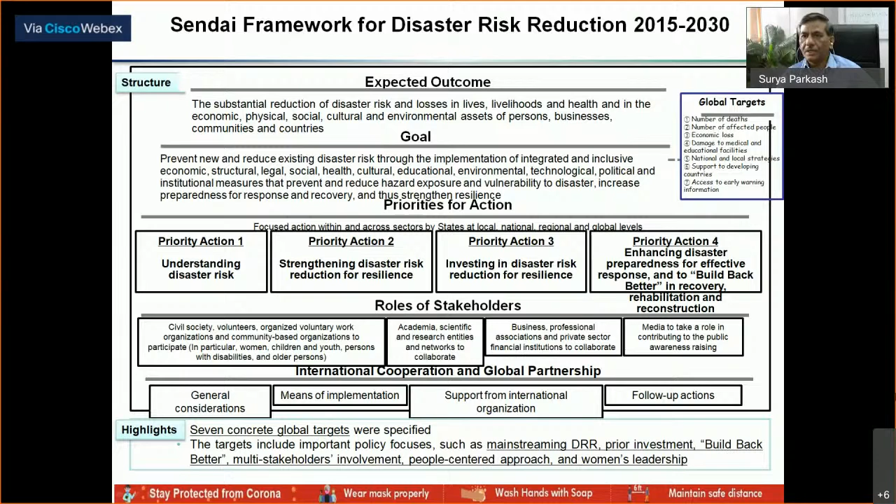The second priority is strengthening disaster risk reduction for resilience, how we can do that. The third is investments in disaster risk reduction for resilience, and fourth is enhancing disaster preparedness. This is what we are trying to do through these awareness programs.

These are the 4 priorities and 7 targets. The targets are: substantially reduce disaster mortality, reduce the number of affected population, reduce direct disaster economic losses, and reduce disaster damage to critical infrastructure and disruption of basic services. This is what we are trying through the learning process and understanding them. The last 3 targets include increasing the number of countries with national and local disaster risk reduction strategies.

We need to have both at the local level and at the national level, substantially enhance international cooperation and collaboration, and complement national actions for implementation of the existing Sendai framework for disaster risk reduction.

The 7th point is to increase the availability and access to early warning, especially multi-hazard early warning. It's recommended early warning saves lives. Some participants asked what about landslides which have not yet occurred, or impending disasters. So we have to have prognostic analysis as well as early warning systems for this.

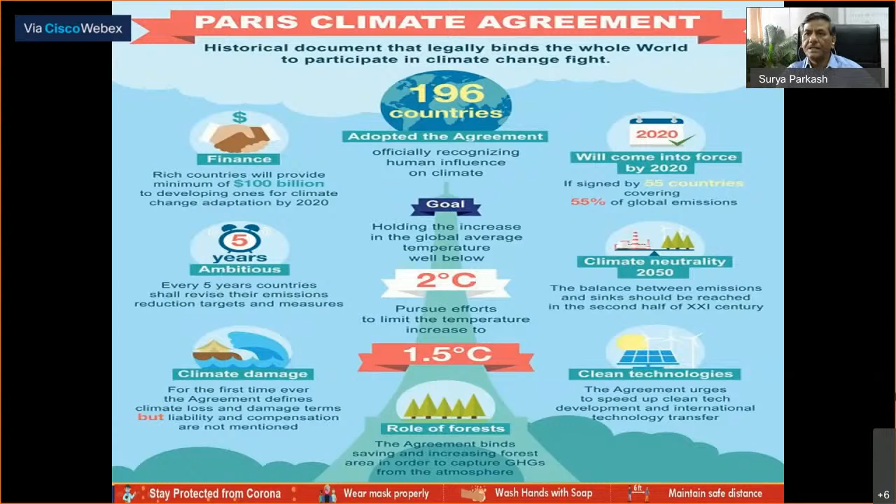The third point is where we've focused on the confined geographical area called hills, in terms of climate change, where these hills are affected the most by the impacts of climate change. We had the Paris Climate Agreement in 2015, where our Honorable Prime Minister also participated, focusing on bringing down average annual temperatures, which are creating more problems, and reducing pollution to the maximum possible levels.

Another parameter driving the occurrence of landslides is urbanization. Areas which never witnessed landslides before are now seeing landslides because of urbanization, development, and growth in those areas. This is likely to increase with time.

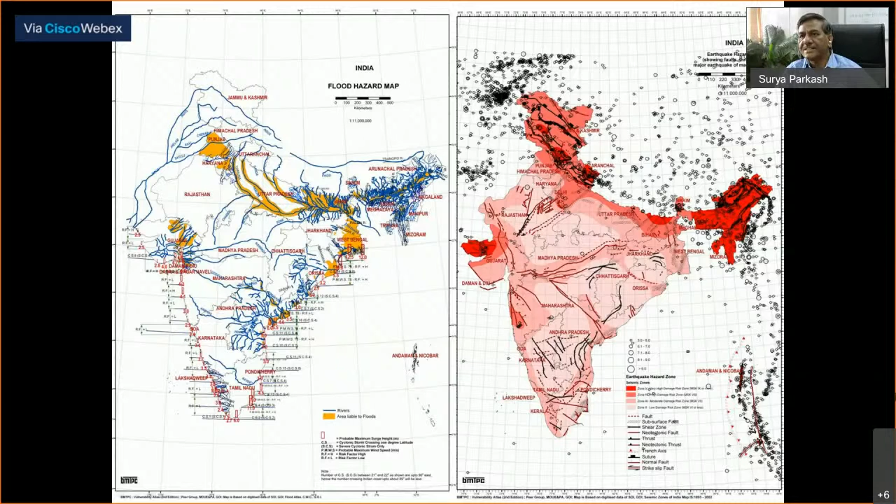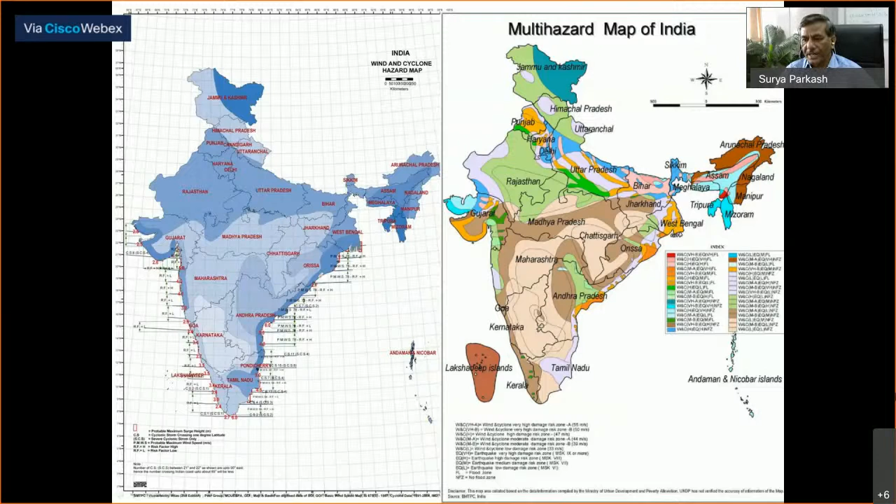So we have to take care of this in a very planned manner, considering the vulnerabilities and hazard susceptibilities related to floods, earthquakes, landslides, and wind hazards, in a multi-hazard perspective, as per our national policy on disaster management and landslides, published by the Building Materials Technology Promotion Council. Overall, we have a lot of hazards that come together, and as a national policy, we don't see them in isolation. We see them in an integrated and holistic manner with a multi-hazard approach.

This is briefly about the occurrence of different hazards in the country. 65% of our land area is prone to earthquakes, 12% to floods, 8% to cyclones, 70% to drought, and 85% to other natural hazards, and 22 states out of 36 states and UTs are considered multi-hazard.

Now if we look at the number of incidents, we find a change compared to geophysical hazards like earthquakes or other geohazards. The hydrometeorological hazards—their frequencies, severities, and intensities—are increasing in terms of epidemics, wind hazards, or floods.

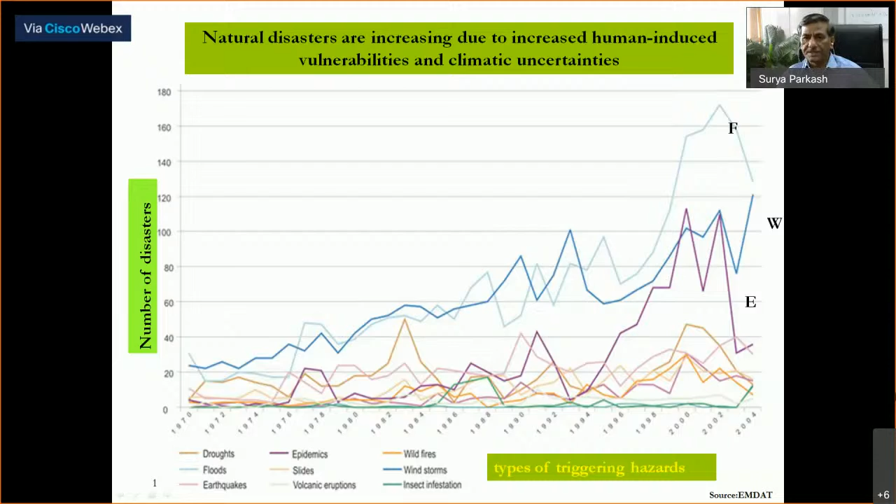Considering all this, we had the Asia Ministerial Conference, because disasters do not know any boundary. Our Honorable Prime Minister gave us a 10-point agenda, actually focusing on all 3 agreements I mentioned prior to this. All these 3 agreements were summarized in this 10-point agenda by our Honorable Prime Minister during the first post-Sendai Asia Ministerial Conference on Disaster Risk Reduction.

Now I come back to the hilly areas. If you look into their development, horizontally and vertically, it's going very intense. We're not caring much for scientific and planned development, and not leaving any space for disaster risk reduction and resilience. Look at any hill area and you'll find both vertical and horizontal development going on, along with a lot of deforestation, explosion, construction, mining, and other activities.

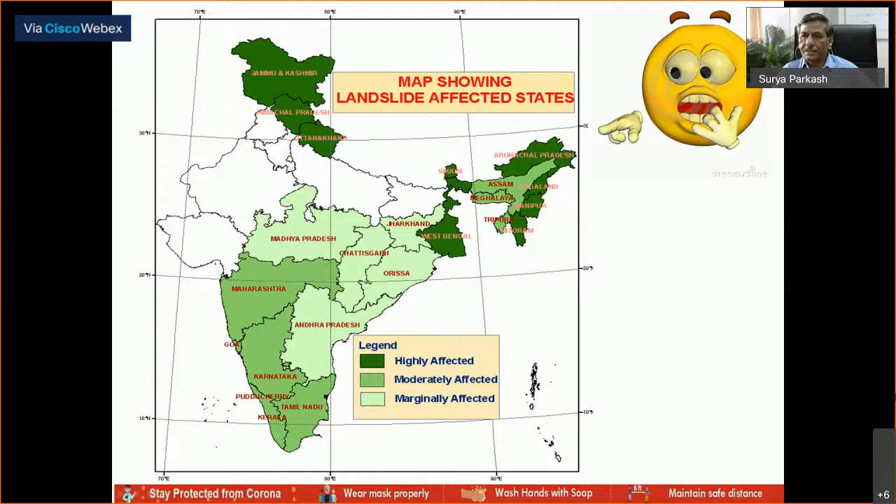While developing the national guidelines on landslides, we found that not only the northwestern or northeastern part of the country, but even the southern part has been suffering from landslides. Kerala landslides are a very good example. In recent times, several catastrophic landslides have happened and killed many people. Besides that, even central India, wherever hilly terrains are present, landslides have been experienced.

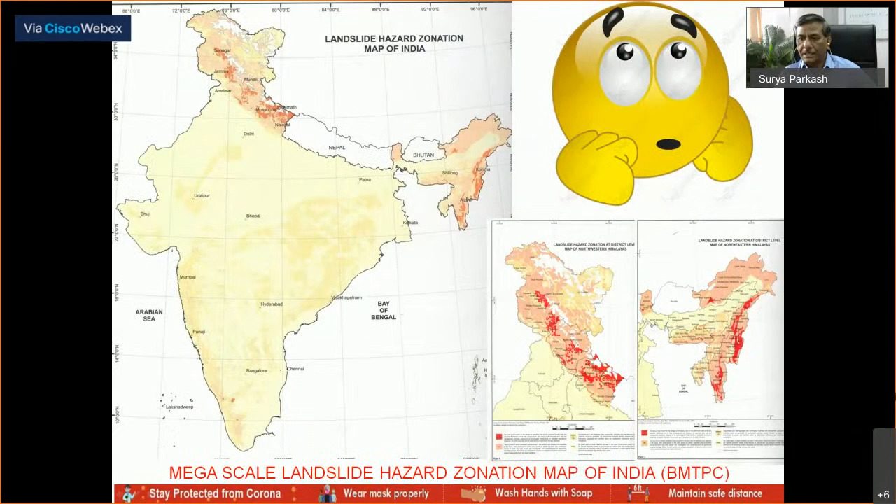We also created a mega landslide hazard zonation map, published at the national level, looking into the incidences of landslides. These landslides are not variable only across space but also across the time frame. We found the number of landslides change in the same area with annual occurrences of rainfall and seismic activities, besides developmental interventions from anthropogenic activities.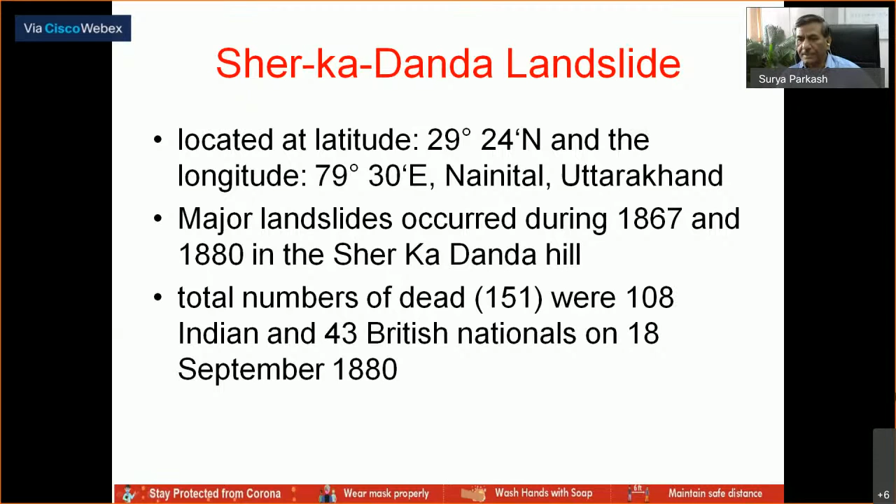Now I'll cite some cases, quickly going through instances in our country. We started studying landslides way back in 1867, and also in 1880, when a big landslide happened at Sher-ka-Danda in Nainital, and more than 150 people got killed. That was the first landslide monitored during the British period. This is an archival photograph of that landslide.

And then the Kalyasore landslide, and then this landslide. I'm showing you the latest photograph, from 2013, when I crossed it after the Uttarakhand flash floods and landslides in June. This was the situation just before it actually got triggered.

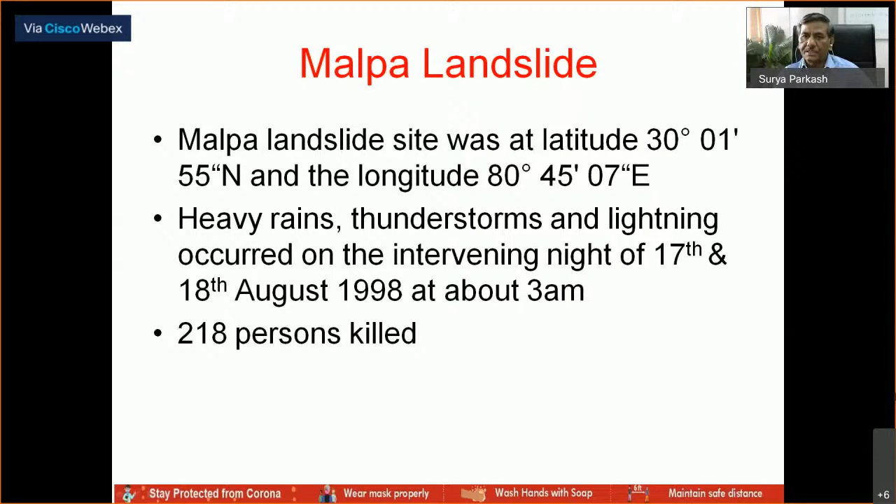The Malpa landslide actually served as a turning point in landslide management, after which the Ministry of Science and Technology constituted 3 major task forces. This was one of those landslides which had killed more than 200 people. The famous dancer Protima Bedi was also killed under this landslide.

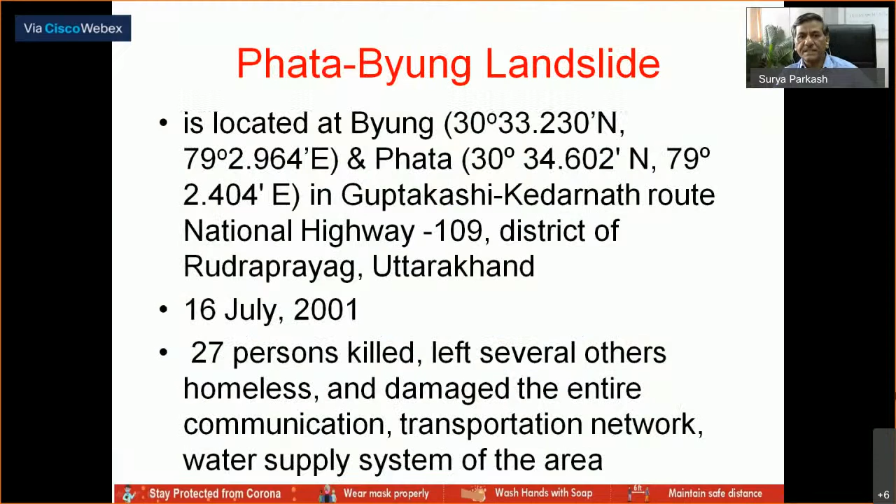There are many such landslides - the Phata landslide, which killed 27 people, and the La Jhekla landslide in 2009, which killed 43 people. These are all instances where several casualties have taken place. This was the La Jhekla village, which was in existence and was completely washed away.

We are not able to recover the people and save the lives of those trapped and buried underneath the landslide - they get killed alive. They are buried alive and killed under the debris, and it is very difficult to even rescue them from those debris, which is full of water, and their body parts are cut by the blunt and sharp stones and rocks present in those areas.

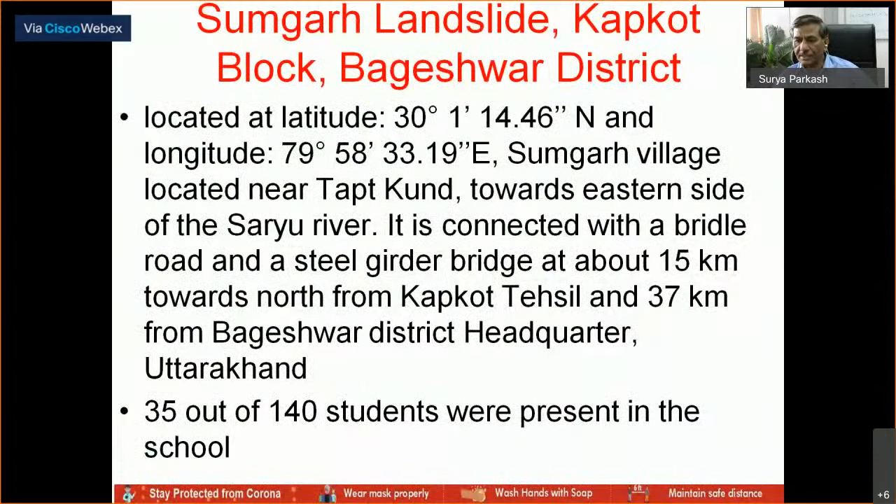In the Sumgarh landslide, not only the elderly, even children in a school were affected and got killed - 18 children on 18th August 2010, between the ages of 4 to 10 years, when a landslide hit the school building from the back wall, which consisted of a single brick.

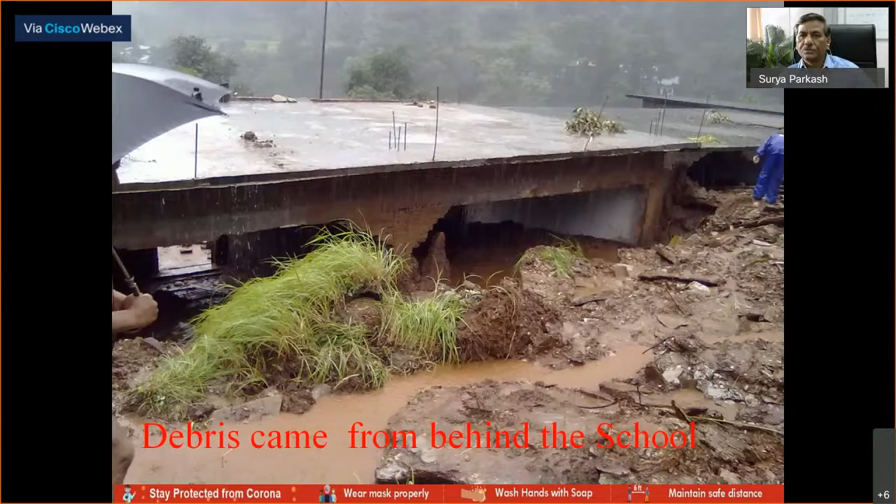So these are situations where access to these areas also becomes difficult. Most of these incidents happen either at late night or in the early morning hours, so response becomes very difficult. Innocent children become victims, and floods are another disaster happening with increasing incidences, intensities, and severities, in terms of climate change impacts.

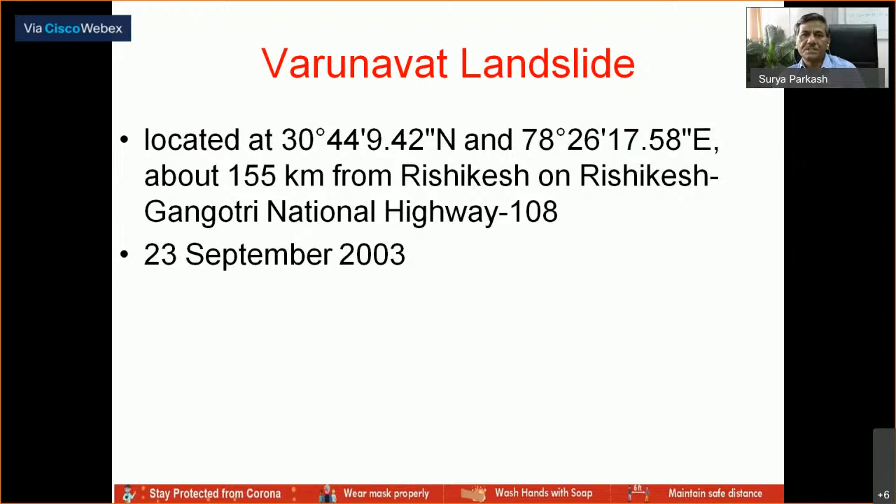Then earthquake-induced landslides - this was one hillock actually affected by the 1991 earthquake on 20th October, which hit the Uttarkashi district. Slowly water got infiltrated into that crack and surcharged the hill. After saturation in 2003, just after the monsoons were over, a landslide took place and the whole hill gave way, affecting more than 400 houses.

So these were the kind of hotels present just a day before the landslide happened, and just a day after the landslide. You can see many of these incidences that happened as a result of climate change and also because of developments.

One of the measures often taken in the hills to manage landslides is posting of bulldozers, JCBs, and laborers. This was one of the landslides with almost more than 500 meters of height, where the bulldozer along with the laborers went into the river.

Four laborers were killed, and you can see this yellow sign where the bulldozer also went with the debris into the river. In the Bastadi landslide, on 1st July 2016, a landslide happened and some people tried to locally save those who were trapped. But later another episode of landslide took place and also engulfed those rescuers who had saved the people trapped in the first incident, and almost 14 people got buried. This was the site in Bastadi village, Pithoragarh district.

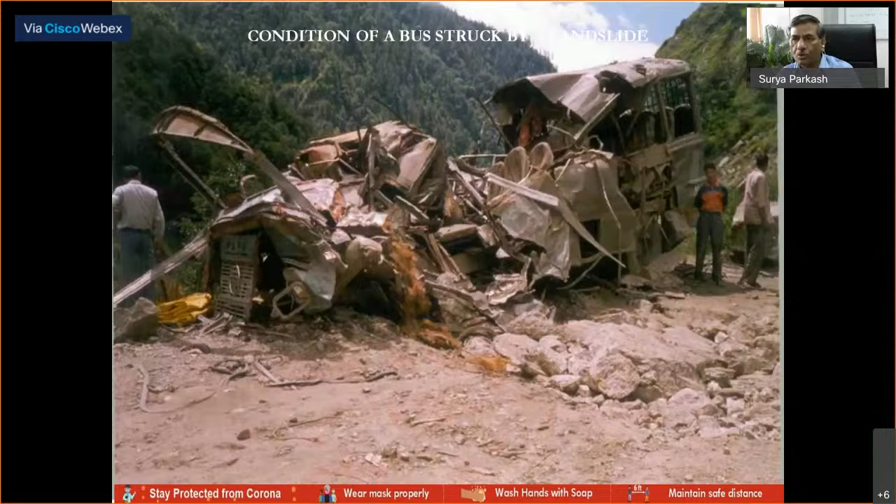So we are concerned not only about landslide treatments, but also their impacts and response, and also prognostics and early warning systems - where they can happen, why they can happen, and when they can happen, and how we can inform people in advance to protect them and prevent these occurrences.

These landslides are not only causing problems along reservoirs, but in river systems also, blocking the rivers at night and creating transient lakes, then taking away the roads close to the river, and also creating flash floods. This happened in 2005 with the Lambagad landslide, in the Alaknanda Valley.

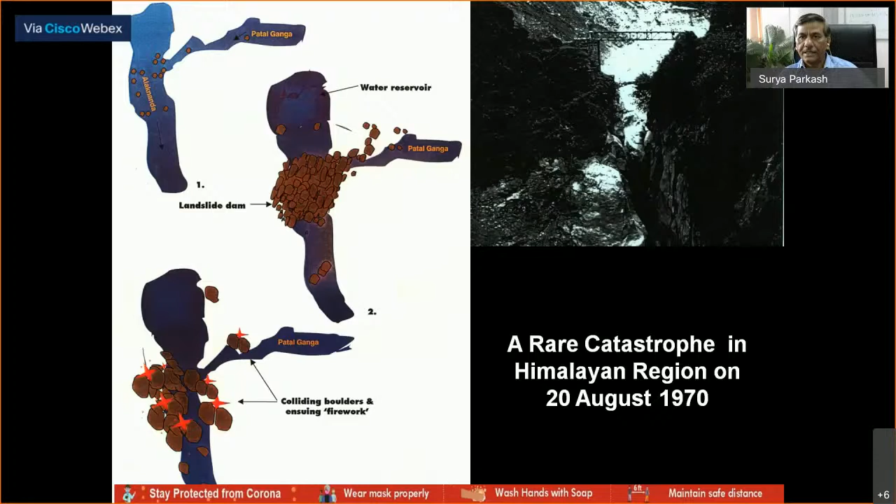Many instances I can cite, and I'm not citing these from literature - I'm citing from the sites which I visited, which we were involved with. So many instances - Patalganga in 1970, a very famous landslide which caused so many casualties. Almost 300 villages were affected by the Alaknanda flash floods and landslides in August 1970.

These situations occur because of geography - very steep slopes and narrow valleys. They cause most of the problems because they can easily get blocked, and when the blockade fails, flash floods and landslides happen. These can be identified geologically, geographically, hydromorphologically - there are many other parameters, and meteorologically we can identify, assess, and forecast them.

So why are we not able to contain landslides, which are one of those geohazards with the highest potential for prediction, prevention, mitigation, and management?

We can identify which areas are affected by landslides, because they normally consist of either loose unconsolidated materials which can easily flow and give way under the force of gravity, or highly dissected and fractured rocks and materials - maybe because of foliation, tectonic structures, folds, faults, joints, or shear zones. All of these can be easily mapped, and we can identify the areas.

They also give indications for common people - areas which were not wet before suddenly become wet, and areas which were wet with water flowing out suddenly become dry, indicating subsurface blockage or diversion of drainage. So all these signs, or sudden appearance of cracks...

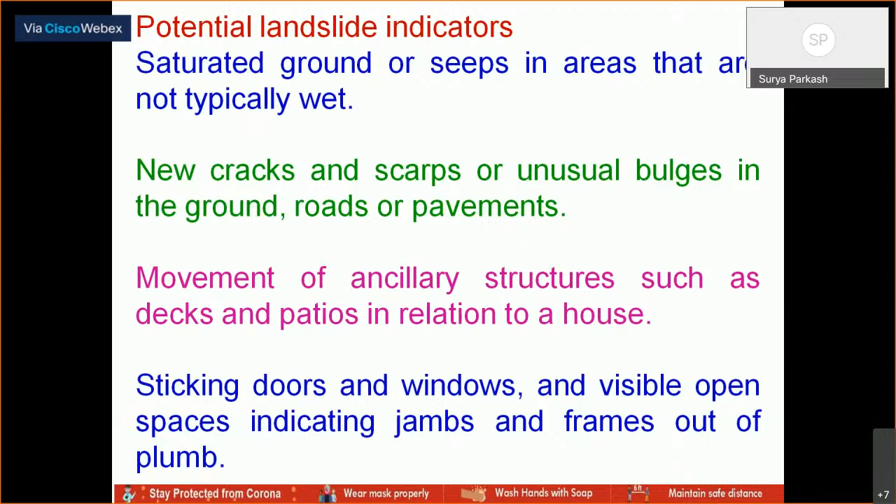I'm sorry, we will not be able to make the PowerPoint presentation. But my view was that we can identify the precursors and understand the indicators of a landslide. They always give us some indication which needs to be understood properly, so we know the geo-environmental conditions under which these landslides happen. We know their indications, and if you know the indications, you can warn people and guide them to protect themselves.

Particularly in habited areas and areas with elements at risk, like hydel projects, bridges or buildings that may be threatened by landslides, flash floods or related disasters, think of them in a multi-hazard perspective. There are many techniques available for landslide remedies. To apply those techniques, you have to identify the exact process of failure, its runout distance, the volume of the mass, and the velocity of the mass likely to move. Using all those calculations, we have the potential to prevent, mitigate, and manage landslides.